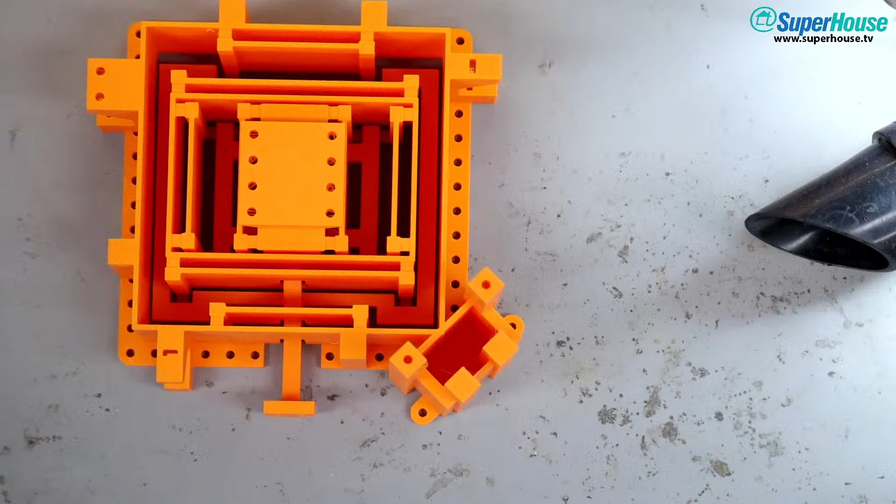Okay, here we go, hang on, I do have to cough. All right, I'm going to do this manually. I'm going to throw to - which camera do I want? Camera 3, okay, camera 3 we have. And this just came off the printer overnight. Look at this beautiful monstrosity. This is Vic's latest creation.

And I will explain this a little bit in - well, how about right now? So this is the core of the most recent RepRapMicron design, and it is called a PIKA, P-I-K-A, which I think is print in place kinetic assembly. Vic, is that correct? Yeah.

So yeah, Stephen says there's a lot of flexures. Yeah, this entire thing, I haven't done any cleanup on this yet, so it's got a couple of little nibbly bits that probably need to be cleaned up, maybe in some slots where nuts are inserted. This entire structure is printed as a single piece.

This is one print-in-place assembly, and you can see that it's got a whole lot of flexures going in a whole lot of different directions, all interleaving so that they offset each other's dimensional distortion. This forms the main frame of the RepRapMicron, and then this is the platform used for the build surface.

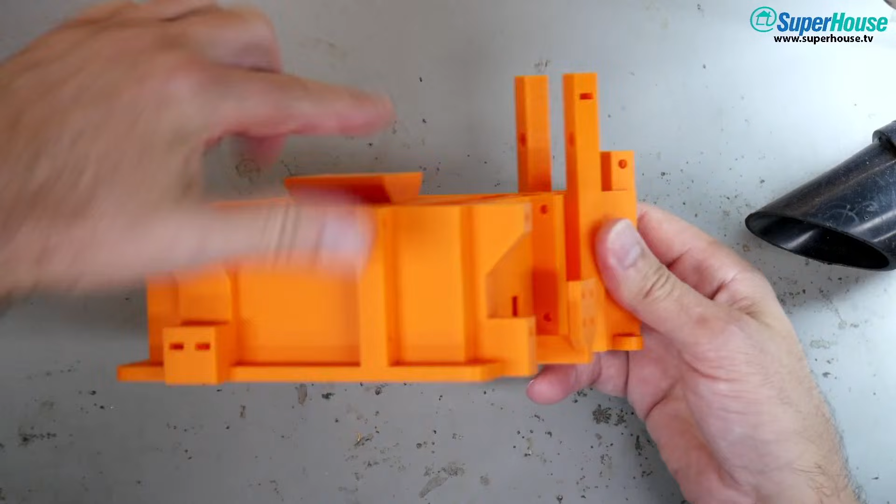XY structure that keeps the dimensional accuracy between this top surface and the mounting plate that goes under here. So as the plate moves, these flexures keep it in that plane. Each set of flexures allows distortion in one plane or the other plane, but not in this one, in the Z-axis.

And then it's got all of these mounting locations around it that are used for attaching the different axis drivers. You can see there are some little slots in here where nuts are inserted and then bolts go through. So in this case, a bolt would come through from above and through the nut, and there is clearance on the bottom for the end of the bolt to come through.

So yeah, this is a crazy work of art. Vic, I am impressed. And this is a single file designed in OpenSCAD. So you just render it in OpenSCAD, export it as an STL, send it to the printer, and it even prints without supports. This was printed without supports, and it just popped off the build plate looking like this.

This is probably one of the more complex things I have ever seen created with a 3D printer in a single piece, for sure. All of these interlocking pieces that all do important parts of the job.

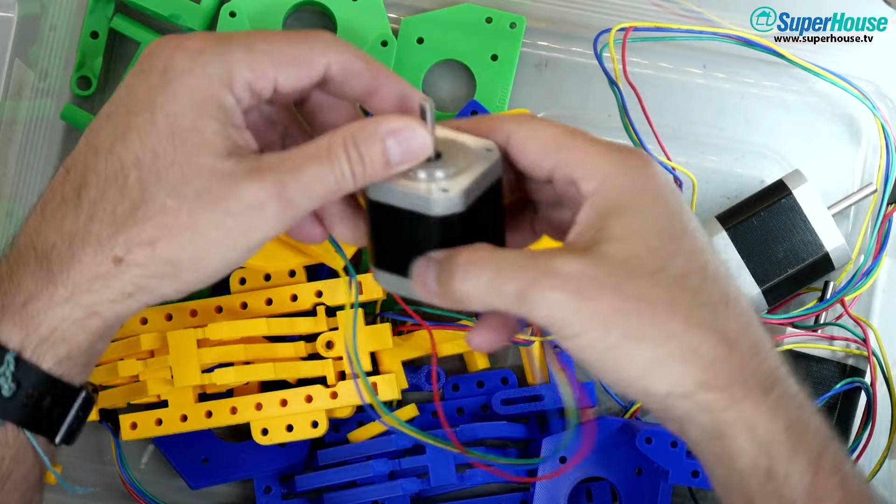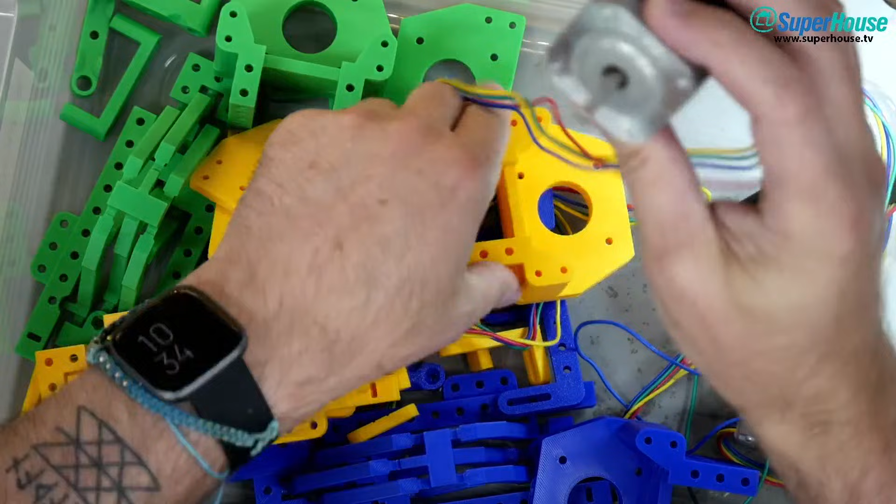Now we've got the 3 axis drivers here. Another part that I do not have yet, oh well, I kind of do. I printed these. This is the adapter coupling that goes onto the motor shaft, and then there is threaded rod that comes out here. So this is how, oops, there'll need to be spacers in there, but for now I'm just going to stick this straight on.

So the stepper mounts into the bracket like that, the motor coupling goes onto the shaft, and then the actual drive shaft attaches that way. So I'll pop that out for now. But these are a slightly outdated design, I think. And also, I want to reprint them because it's a little bit hard to see on camera.

This is what I was talking about last week or the week before. I printed these onto the smooth high temperature engineering build plate, and it suffered a little bit from elephant's foot. So it squashed down the first layer, which caused it to spread out, leaving a little ridge all the way around the outside. That in itself is not a problem, I could just trim it off with a blade. But you can see the structure on the inside here is this little spiral structure, and all of those also have that elephant's foot closing up the gap between those little parts of the structure.

I could go through with a scalpel and very carefully trim the insides of all of these, but I think the simpler solution is that they don't take long to print, they're only little things. I'm just going to print more of these on the textured PEI plate, which is what I've used for all the other parts, and the first layer result on those is good. So I'd rather not compromise it. I want to give this whole project the best chance of working, so I'm going to do it properly. So let's switch back to my ugly face and have a look at a couple of things.

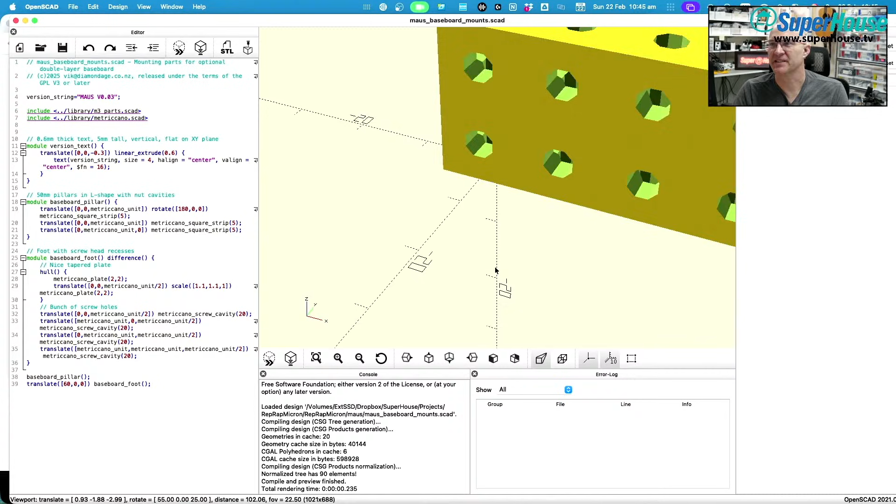Nope, that is not it. Ooh, Amanda has just sent me info about the external encoder that she uses. Thanks, Amanda, I'm going to check that out later.

Now, what I'm actually looking for — so those are mounts. What I want is the baseboard. So that's baseboard mounts, complementary maus pika, maus probe, stage deprecated. Maybe I'm looking in the wrong place. Vic is probably shouting in the chat right now, telling me where it is. Chris Ben says, plot twist, TTS was causing the slowdowns. Geeko Farm said, what are you looking for?

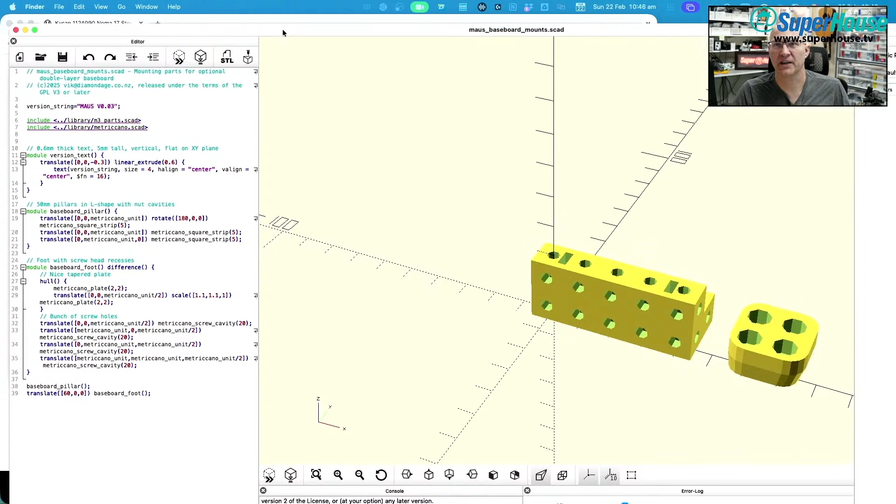Okay, what I'm looking for is the baseboard, off the ground so you can hide the electronics underneath. I thought there was previously a laser cut base out of acrylic with a whole lot of holes in it, and that has now gone away, I believe — or there's a new version that needs to be printed. So is that replaced by this? Is this the equivalent? Oh, Pika's base is in the maus_pika.scad file. Okay, let's try that. It's commented out at the bottom.

Ah, okay, got it, cool. So then, if I — come on, why wouldn't it open? Maus Pika, oh yeah, this is it, I opened it previously. Open. Commented out at the bottom. So if I, hang on, I'm going to zoom that out so that we can see it.

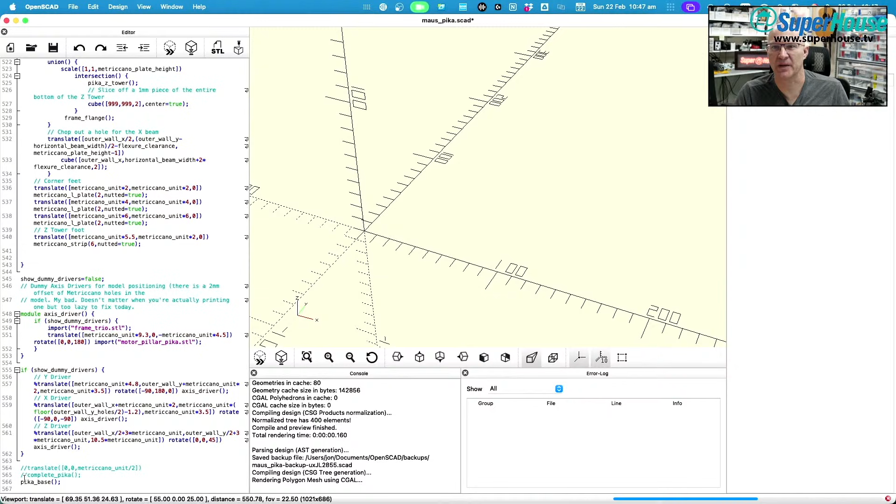Down here, Pika base — I will uncomment that and then comment out complete Pika, I guess. Let's find out, and render, let's see what happens. Is that done? No, maybe you need complete Pika as well. Pika base.

Okay, so that's what we need to print. I think it might be. So let's export the STL for that and send this to the printer.

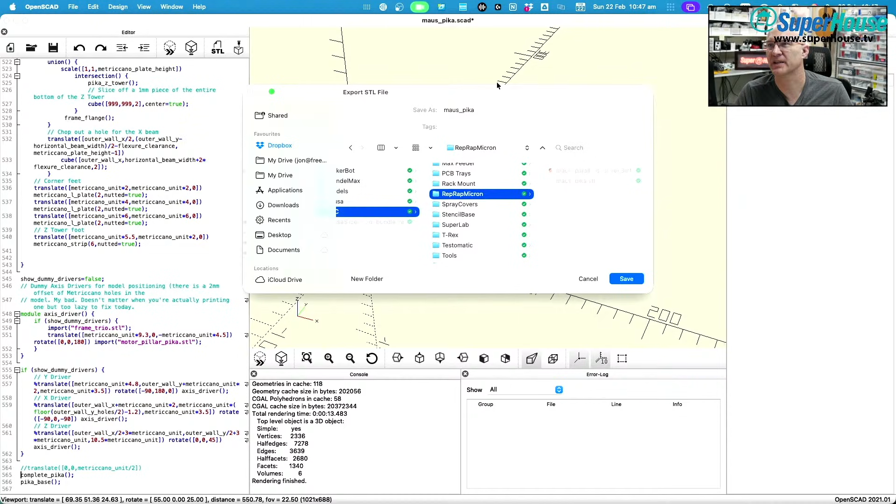3D printing, X1C, RepRapMicron, maus Pika. I'm just going to call it maus Pika base so that it's distinct. And Bambu Studio. Here we go. I'm going to send this to the printer so that it can be doing that while I get on with other things.

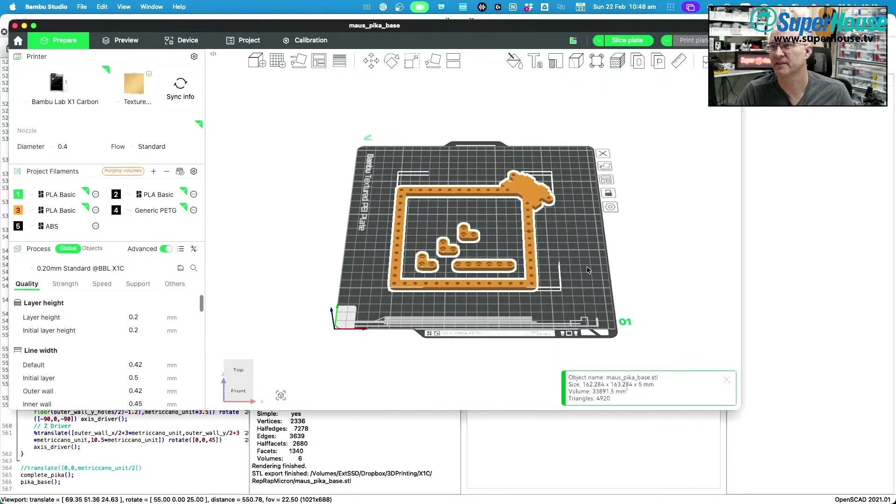Prepare, and I want to go to... no, that. Okay, and then I'm going to change it to the same color as I did the Pika itself. What have we got here? I don't think any of the settings really matter, I'm just going to leave it on standard. There are no flexures involved in this, so 3 layers on the bottom is fine. 15% infill should be fine.

Slicey and dicey. And, oh, hang on, did I have an extra option turned on? Slice okay, I just wanted to turn off... oh, it doesn't matter. The preview here shows the flow calibration being done, but I don't think it actually needs it to be done. Time-lapse, flow dynamics, auto leveling, everything off.

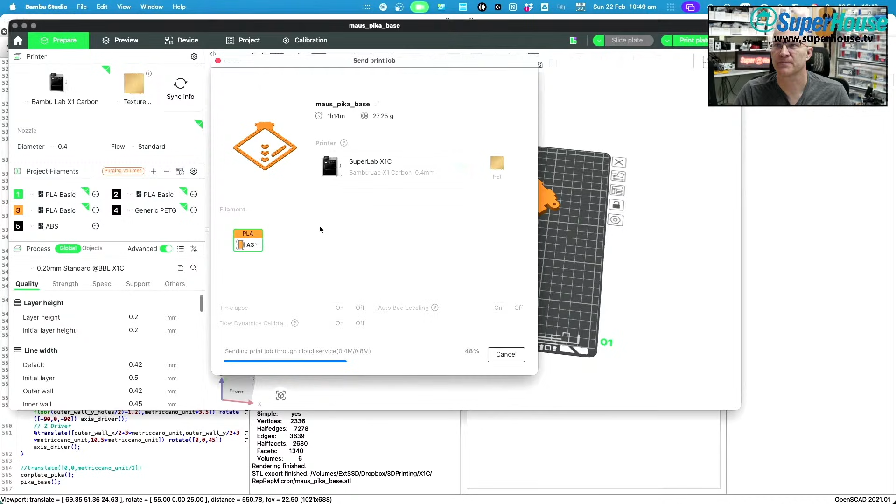Send it to the printer. Go. 1 hour and 14 minutes - that's a pretty long print. It's surprisingly long for something that's only 27 grams of filament. Why is it 1 hour and 14 minutes? It's a little odd.

Okay, so Vic said the little angled bits and strip are basically feet to hide the nuts in so that they don't scrape the table too bad. Okay.

Using a 0.2 nozzle. Oh no, it's not a 0.2 nozzle, it's a 0.4 nozzle, but 0.2 layer height. I think that should be the case. So we've got, yeah, layer height is 0.2, minimum initial layer height 0.2, but the actual nozzle is a 0.4. Others, I'm not even sure where it's set in here. Advanced... nope, don't know. Yeah, 0.2 is the layer height.

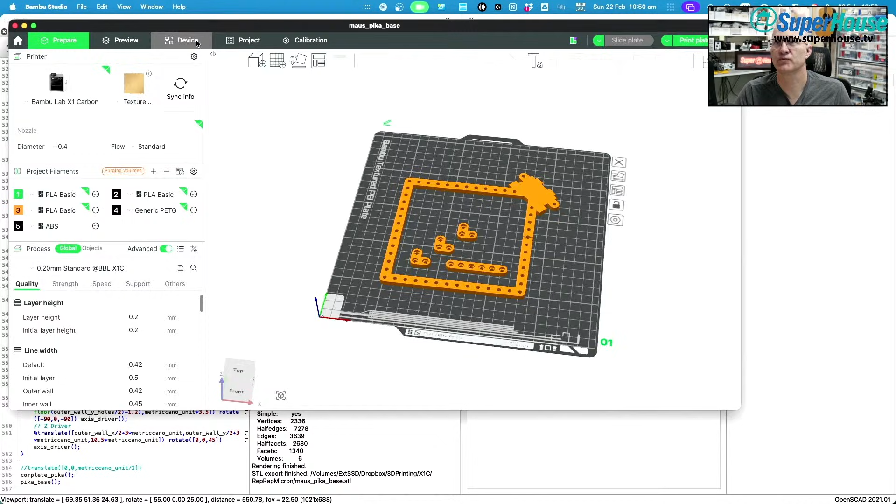It'll be taking a little while. It's got to get up to temperature, and then we can see what's going on with that. Oop, there it goes. Oh, and look at that, there are some googly eyes on it now. Googly eyes have been applied.

It was Pete who got me to do that on Friday because, yeah, I've been saying I need to put googly eyes on the printer for a while, and Pete came to visit.

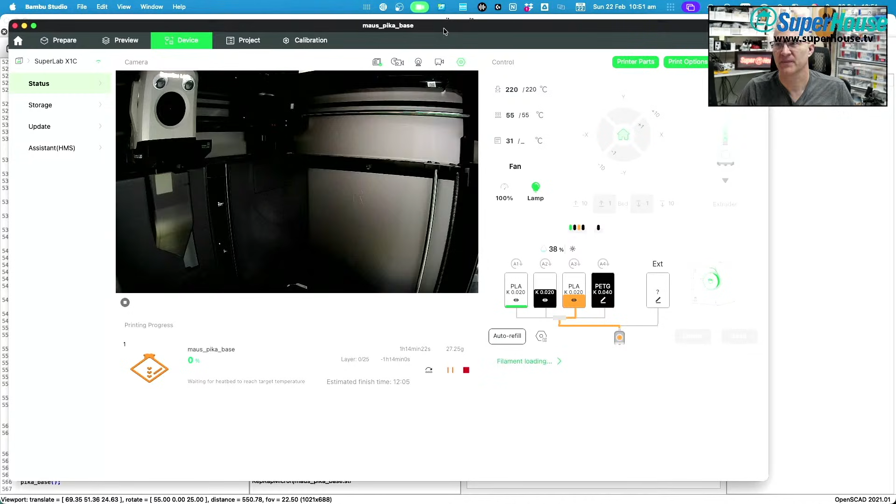Okay. Vic says, when I know where all the holes should be, I'll fill the rest in. Yeah, so a fair bit of the print time would be the features like doing the perimeters of the holes. And if you can eliminate those features, it'll print more quickly. But for now, it's fine.

Okay, let's move - Imi isn't here to see them. Imi isn't here to see them. No, hang on, I'm going to bring this up. Quick, take a screenshot - these are Imi's googly eyes.

What's actually disappointing is that the field of view of the camera in the printer does not show the top part of the extruder when it's printing. Like if this is over in the middle of the bed, the eyes are off the top of the screen and you can't see them. I think it'd be funny to see the eyes jiggling around as it's printing, because the printer moves so fast that they would jiggle for sure. Jiggle, jiggle, jiggle, yeah.

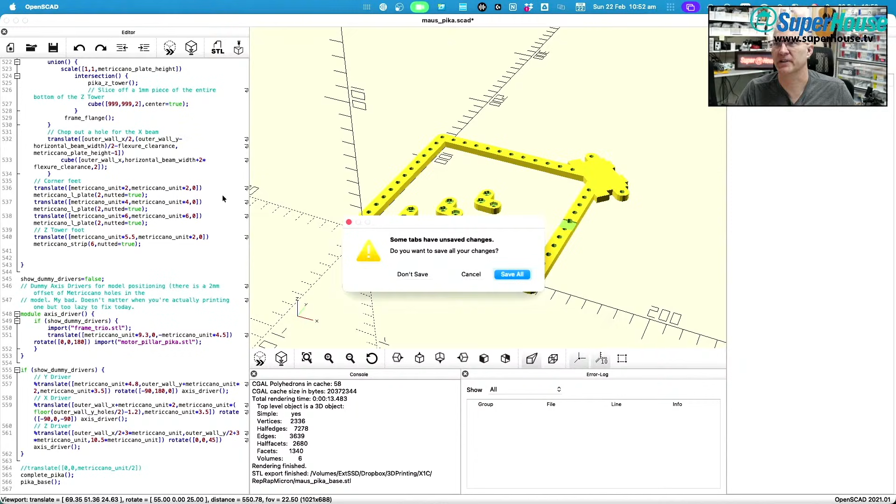So, what am I doing? What am I doing? Okay, so we've done that, we've sent this to the Printermatic, and I'm going to quit out of that. Don't save. Close that. Then what am I doing?

Okay, I'm going to RepRapMicron, not my fork of it - I want to go to the original. RepRapMicron. Vic.

Let's find this. You want to create a print that maximizes the eye roll. Oh, that joke made me eye roll. Actually, no, it didn't - it made me laugh.

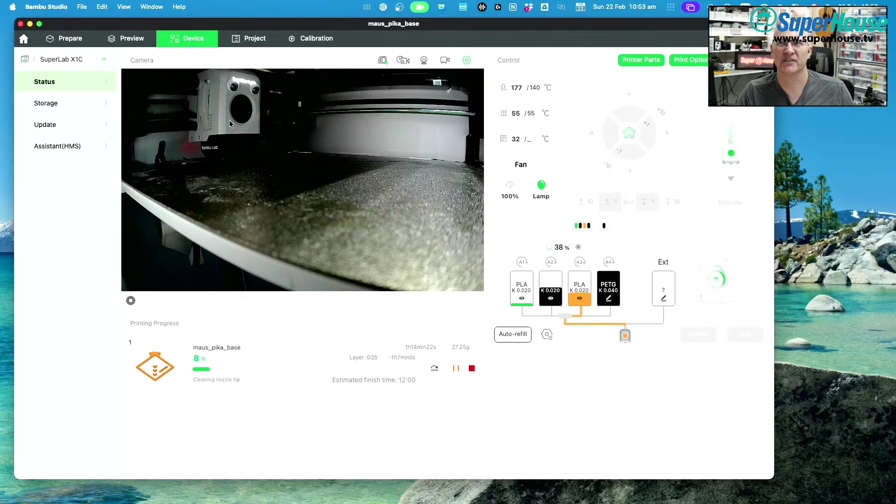Put the eyes on the bottom and then it prints upside down. Yeah, I want to put a smiley face across it. Hang on, if I get it back up on screen before it starts moving - see, it's got eyes here. This looks like a nose. This is the fan, like the top of the fan. And I want to put a mouth across the bottom of the grey bit, like a smiley mouth under there. This could be its mouth. Imi, quick, have a look - googly eyes. This could be its mouth, like if it's doing a shocked face. So this could be a shocked face, or that could be a button nose with a mouth under it. I think either works.

Yeah, so... Vic says, I was going to add an embossed squirrel just for you. Yeah.

Yeah, David says, no, that looks like a giant open mouth of, oh my God, what are you printing? Yeah.

So you can see the Prusa printer right there. You can't really see it because it's behind the X1C, the Super.

Yeah, there's a little bit of fumes that come off it. When the printers are running many hours every day, the cumulative fumes start to become a little bit annoying, which is why I relocated the X1C to the back of the clean-ish room, so it's way down there where ventilation can take care of it, and I don't have to...

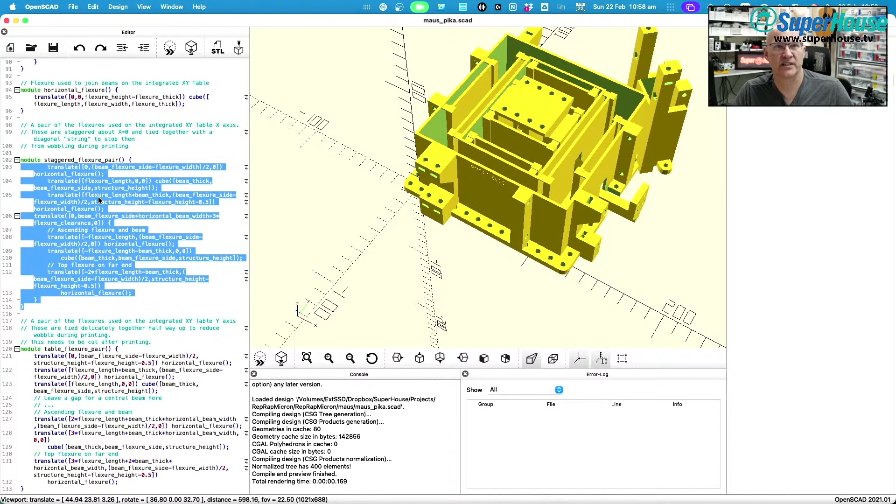And then because all of these variables are derived from values up here, what it means is that if you want to tune the thickness of the flexures, you change a variable up here, and then the geometry that is derived from it changes down here.

And so it's a process very much like compiling code, starting from the top and running down. It's got all of these things defined, and then you execute particular routines. So with complete pika enabled, this is what comes out. And there's this—where is it? This one, preview. If you click on preview, you can see it's processing all of that code and generating this view. And if you click on this one, I think it's render, yeah, so this goes through and executes all of this code to generate the model from the code.

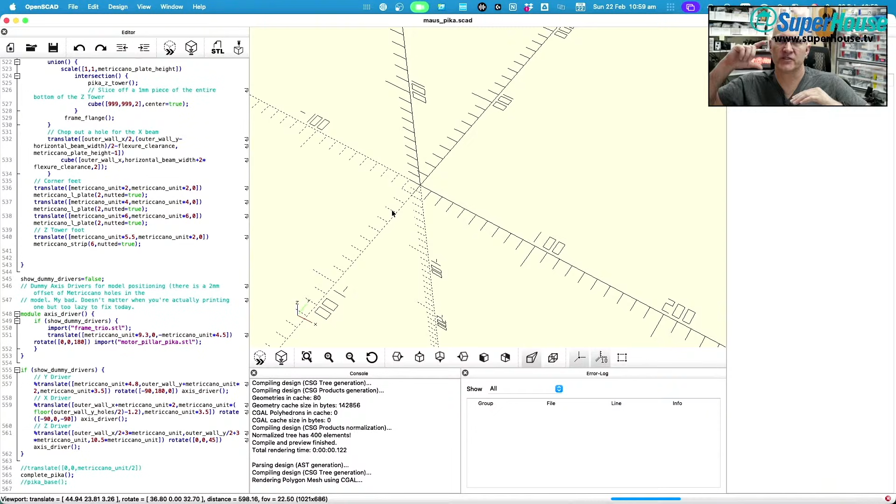So when you look at an SCAD file, it's just text, I believe. Let's find out. Nah, that's not... Rendering polygon mesh. Yeah, so it took a while to process, but essentially that was compiling a physical object from the code definition. And then, yeah, you can make changes and recompile and get the updated version of the object.

And then from there you can export to STL or do whatever you want to do with it. So it's pretty cool. It's very different to modeling in other types of systems.

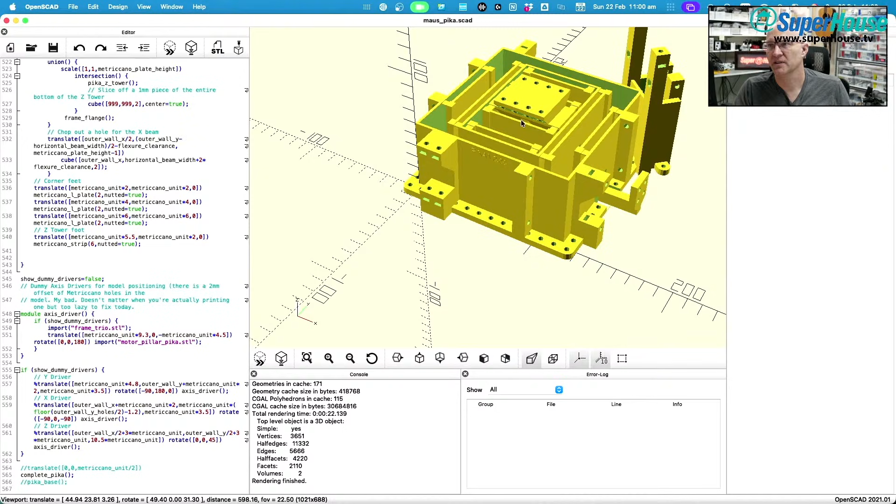Allow, log in. Let's see if it remembers. Maybe it will. All of this, all of what I'm doing on my phone right now, is to avoid standing up and walking over to the kettle to turn it on.

Oh, I don't care about your updates. Continue. Okay, Kogan Smart Kettle. Let's see, where is it? iPhone mirroring, phone in use. Okay, I'm going to do that. And now I should be able to go... Kogan Smart Kettle on. There. Now I can boil the kettle.

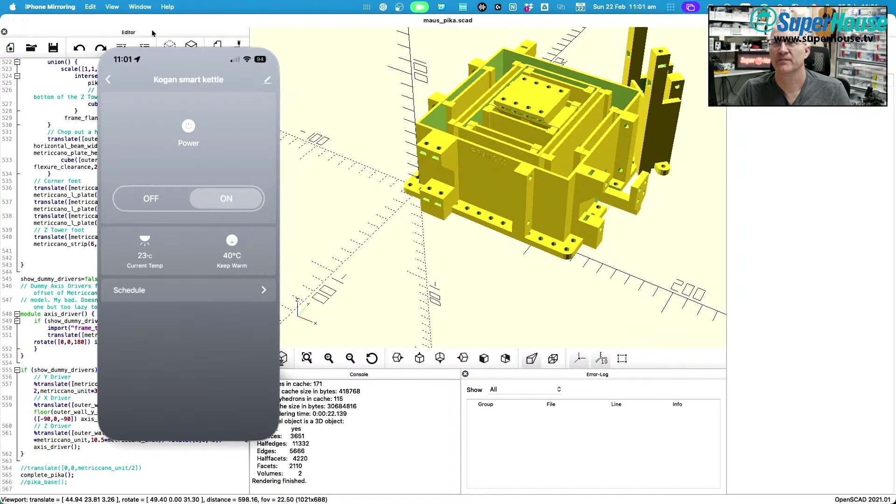Wonder if it's going to give me some info. Power is on, temperature. Yeah, you can probably hear it now. Kettle is boiling because I remoted to my phone from my desktop, which talked to their cloud service in China, presumably, which talked back to my kettle, which is 3.8 meters away from me.

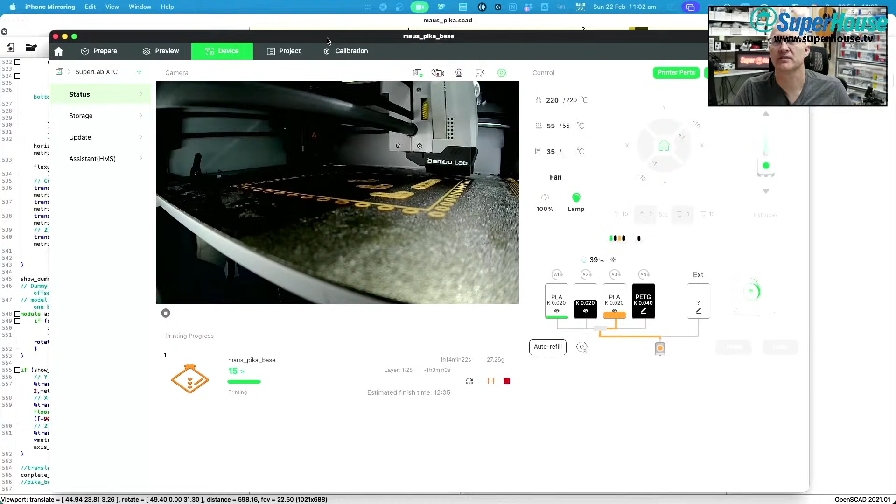Yeah, okay. So the question is, this is a question I should have answered before the stream. Where should I grab the... Imi says, can you turn my kettle on, John? Sorry Imi, I can't, not from here, not unless you can give me remote permission. The misappliance of technology, yeah.

Andy says, OpenSCAD is awesome, but obviously not as popular as graphical tools. Perhaps with AI coding assistance, the programming grind of using OpenSCAD will be eliminated, making it more popular. Yes, code, but yes. So I find it really interesting that...

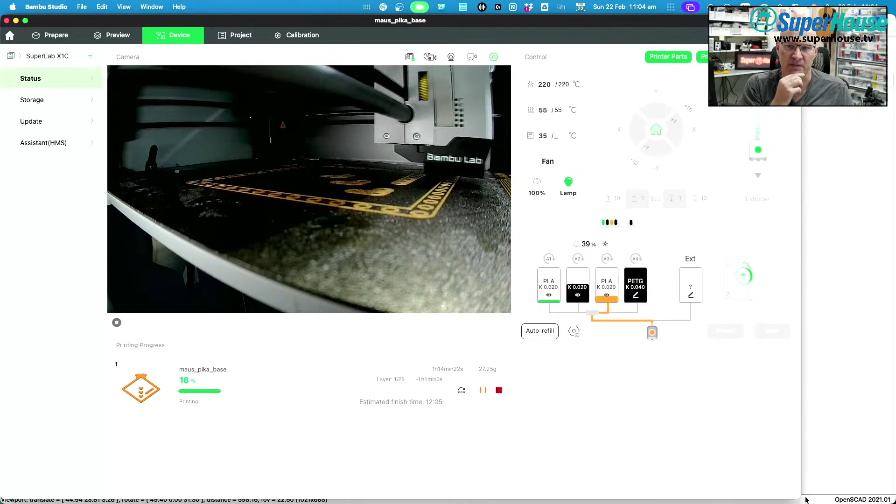I'm pausing because this is a rabbit hole I could chase that would take me way off topic, so I'll give a shallow mention: it's the move towards things like markdown files and just text files for documentation and other purposes, because they are so easy for LLMs to work with. If your documentation is in a more proprietary format, like pages in Microsoft Teams, the LLM may not have access to it. But if it's text files sitting on your disk or in a repo, LLMs can read those. So we've seen a move towards Markdown.

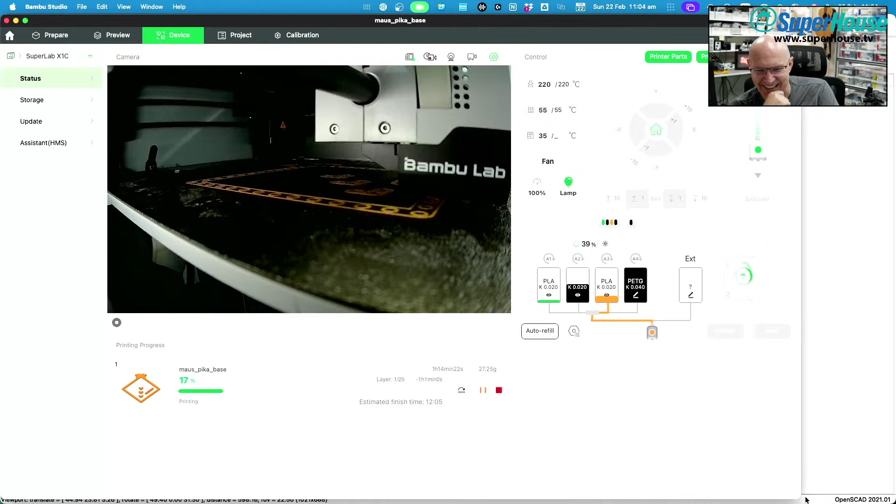Henrik, what is that face? Yeah, that is a weird face, but thanks for the super chat.

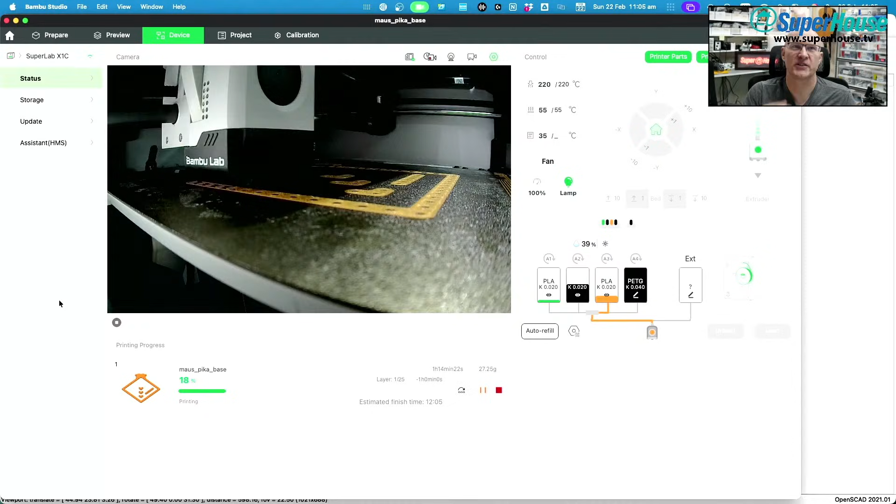Geeko Vic says, ChatGPT sucks at OpenSCAD. That's interesting. So it is really good at generating Verilog, for doing things like FPGAs. Esoteric things that have text files as their low-level format, AI is generally really good at dealing with. So it's like this weird resurgence where text-based history that we'd moved away from is given new life. If your documentation is pages in MS Teams, real people are able to reliably read them. I was just using that as an example of some way information can be locked up in a proprietary format and not so accessible to AI.

Anyway, I'm not going to dive down that rabbit hole too much. Now, where was I? That's right, I'm going to get back out of this. We don't need this, I want to start actually bolting some stuff together. Let's figure out how to do that. Hang on, I've got to cough properly again. Okay. And the radio voice is back for about 3 seconds.

Sorry, I am losing the plot again. So, V4 upgrade section. Now, is there a... oh okay, so this is the old flexure table construction, which I've printed. Those parts are back there behind me, but I don't think these are relevant anymore because it has all been replaced by the big fancy picker. So we can ignore all of this. This, I believe, is the system that Vic had demonstrated at Everything Open, which is also really cool, but that doesn't help for my assembly of the new XYZ stages.

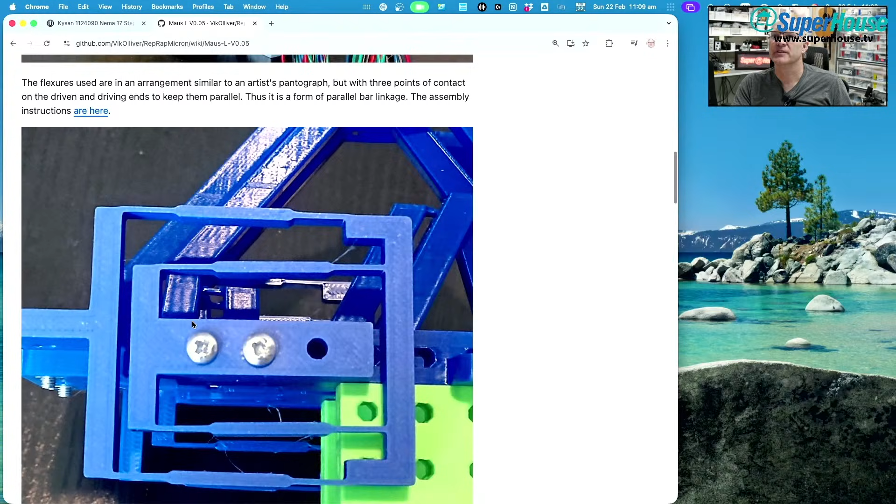Amanda_RFT said, "Is it time for coffee cam?" I think it's time for coffee consumption. It's similar to a pantograph.

So these photos are based on the V0.4 pre-picker. Look right, John - up here? Maus XY flexure table construction - is this what you're talking about? I think I've already found it. Right side of the page, Maus axis driver construction. Oh, there - yeah, cool, so that right there. Axis driver, nice. Hang on, I've printed mine, it almost looks like that.

I've got one printed in that blue, almost that blue. So 3 of these completed assemblies are needed, and they are identical, apart from one, which has a slightly shorter mounting thing here - it's got 2 columns of holes instead of 3. But apart from that, they are identical.

Part preparation, okay. 3 fasteners need to be prepared - these are the most complex machining operations in the assembly process. Also some wiring. Select the most pristine M3 by 50mm screws available. What do I have here?

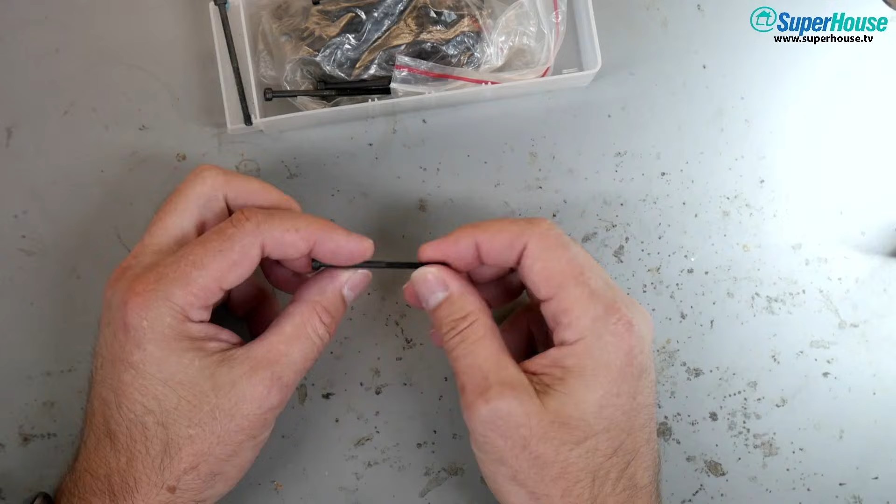Yes, okay, so there's a little bit of preparation to do. What I'm going to do is switch to overhead view. Oh yeah, these are the M3 50 millimeter bolts that I've got, and they are actually pretty decent quality - nice ones, but the thread is just from there to there, and then it's just plain shaft from there to there. So possibly not suitable, depending on.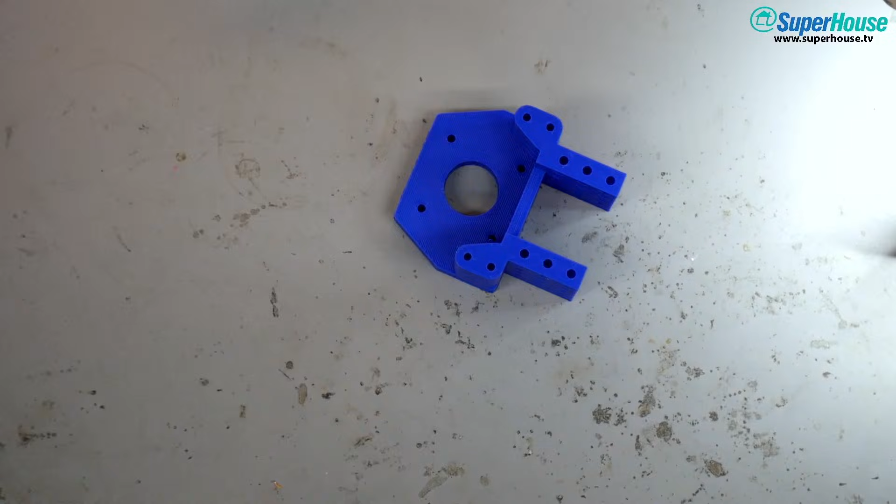Yeah, less yapping, more tapping. Let's throw some of these things up on here. So I'm going to get all the parts out for the blue axis and use this as my... whatever, first thing. Whoop, whoa.

Okay, putting that aside, the funky thing. We've got the spacer plates here, we've got the NEMA 17 mount here, and there needs to be a little bit of cleanup in some of these holes because nuts need to go into these spots. What else do we need? Where else needs cleanup? That looks good. That needs a little bit of cleanup. Little bit. Okay, I'm just going to get on with it.

So, talk amongst yourselves. No, talk to me, come on, use the TTS. Take advantage of the fact that I'm away from my computer right now. I can't actually see the chat properly, so if you want my attention, you're going to have to TTS it.

Yeah, this is not the most exciting part of the process, but a bit of cleanup now, hopefully, will make things easier when I'm putting it all together.

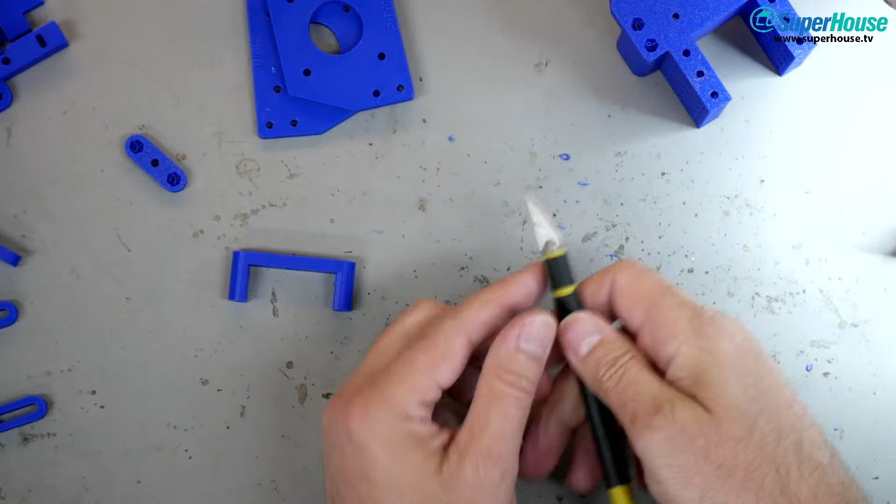Yeah, I should get myself one of those little deburring things that's got a handle with a thing that comes out shaped like that, and it's on a spinner. So you put it into a hole and go, and it cuts out the edges on the inside.

So yeah, I've used those before. I know people who have them, and they are very cool for cleaning out things like little edges of round shapes. They work very well.

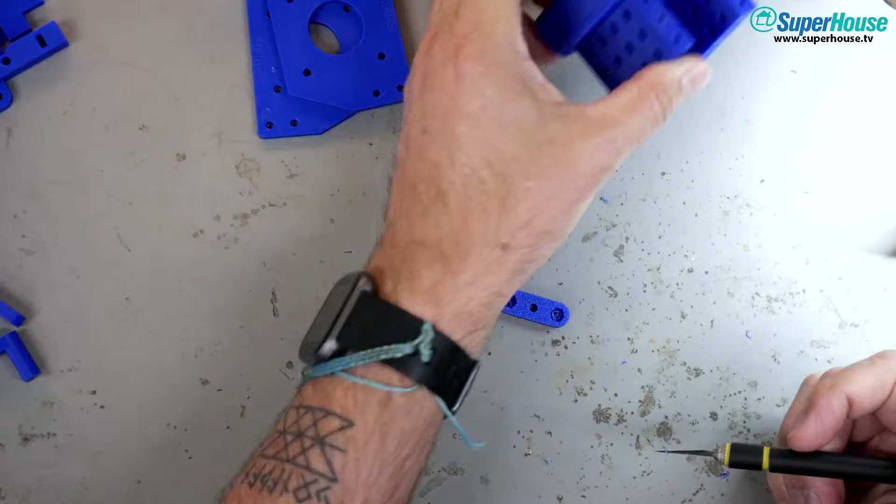For example, with this, if I wanted to clean out burrs on this edge, it'd be perfect. You'd put it in and just go whoosh, and it would all be neatly cleaned up.

But I don't have one. I should order one. So many tools that I want to get.

Okay, I am, as you can tell, having trouble talking. I find it really disconcerting to be isolated from the chat. Right now I am doing this and looking at it.

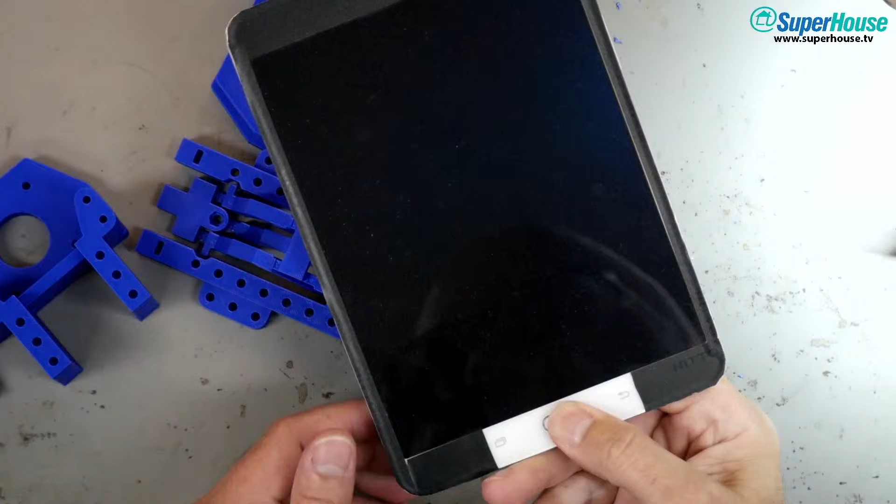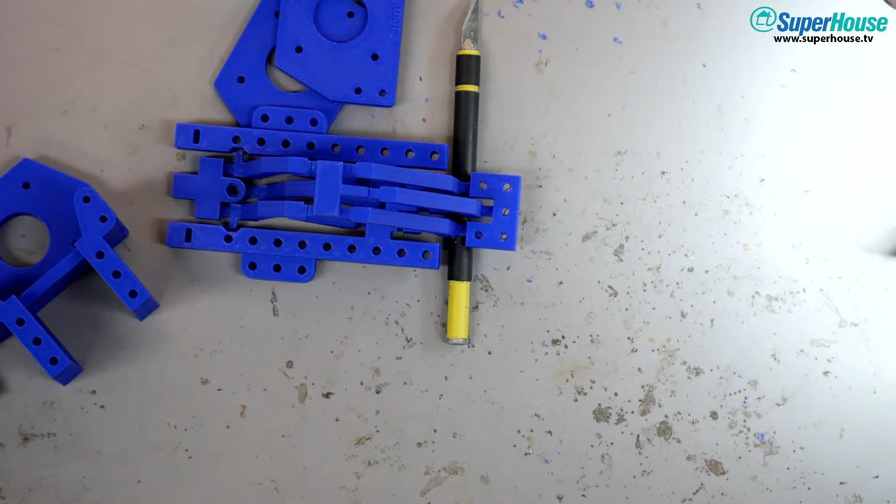I forget that this tablet is even here. This was Chris's tablet originally. This was attached to his wheelchair, and...

Nick bought a Samsung Galaxy phone. Chris bought a Samsung Galaxy tablet because he thought the big screen would be handy attached to his wheelchair for reading books and that sort of thing. And he ended up just not liking it.

How much battery does this have? 42%. This has been sitting up on the shelf above my bench for, it'd be months since I turned this on. And it's still sitting there, 42% battery.

Okay, swipe screen up to unlock. I'm taking this off camera right now. Okay, swipe screen to unlock.

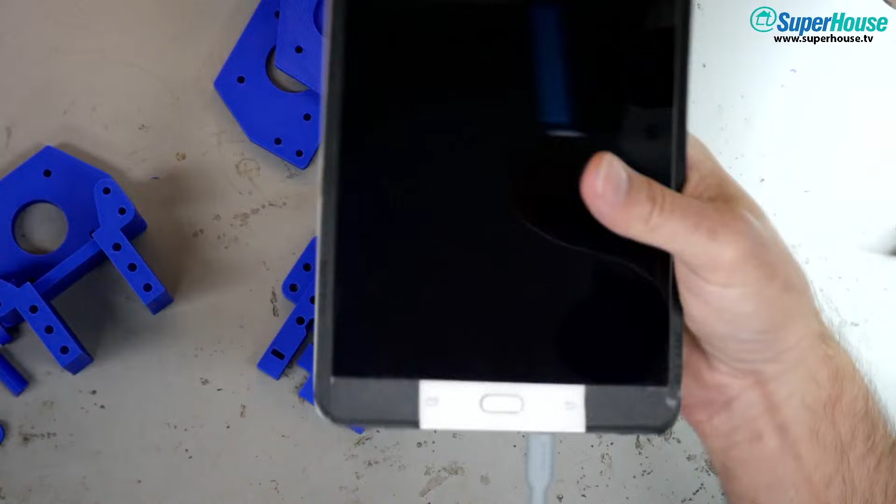What was I saying? That's right. So Chris got this tablet and attached it to his wheelchair, and it was just so large and awkward that he didn't like it. Later, after Nick died, Nick's Samsung phone became available, and Chris got rid of this, took it off his chair, and replaced it with the Samsung phone.

YouTube, come on, open, switch to YouTube. Oh, this version of YouTube is out of date. Look at this, no updates are available for your device. Okay, I'm going to have to do this the hard way.

This is a very, very out of date device. In fact, I wonder if... oh yeah, got it. I wonder if this browser is even going to work. Come on, give me a keyboard. YouTube.com, go.

Here I am doing something silly when I should be working on this. It's taking a while to load.

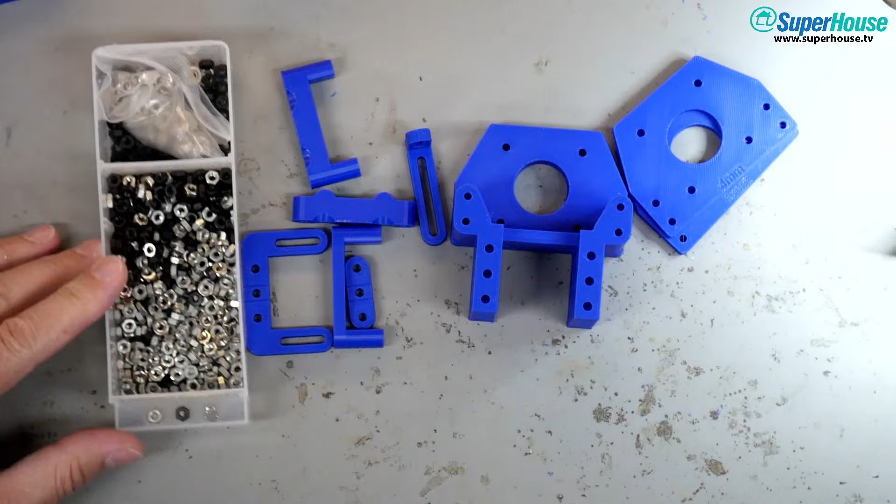M3 nuts, okay, M3 nuts, here we go. So this thing has these captive nuts, and then these spacers go here.

And the motor goes in like this. So what happens is that we will end up with bolts that go through from the top side through the spacers into the motor, but we also need to allow for bolts going in here and gripping on nuts in here. So once these are together, we will have nuts captive between the layers of the spacers and the main mount.

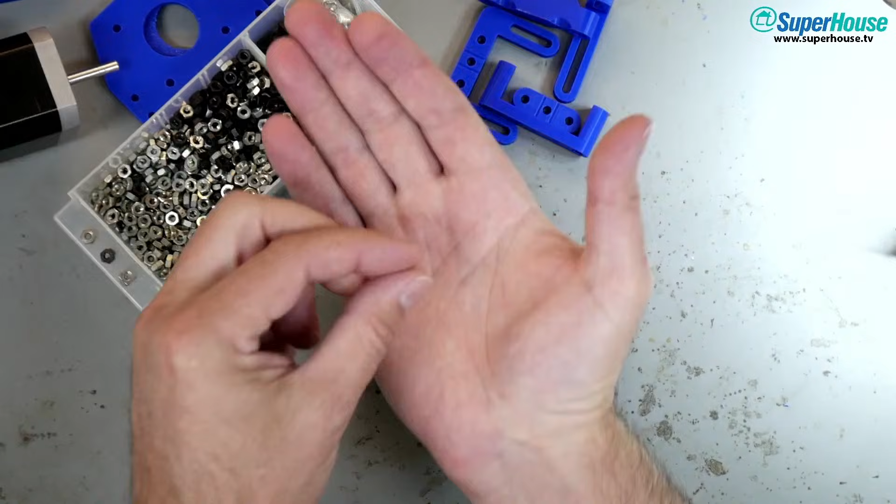So I need to insert some nuts in there. I've got a few different sizes of nuts here, and these M3 nuts actually vary in their body. These ones are a stainless steel sort of finish, physically larger, and I'm not sure if they will even fit. No, they won't.

There are some others here, these black-bodied ones which are fairly small. There are some here with a matte sort of finish, and I think I want to use those ones. Boop, got away.

Oh, what am I doing? Got away again. So I think these are the ones I want to try to force into these holes. I feel like I need a hammer at this point, a little tippy-tappy hammer. What can I use as a tippy-tappy hammer?

Okay, hang on, I'm going to just make sure the volume is off, and I'm going to open my own stream so that I can see the chat. Where is the chat? Where is... yes, I'm looking at myself. Here we go, my own stream.

Now where is the chat on this interface? I want to see the chat. No, I can't do it. I can't see the chat.

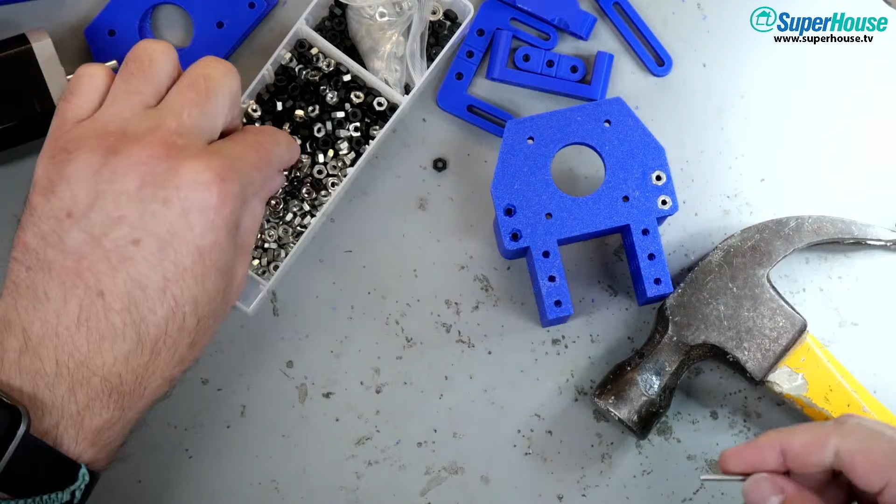Yes, so whoever it was that suggested using a bolt to put these in, a sacrificial bolt, thank you. Was it Austin? I can't remember, someone said it in the chat a minute ago.

What? Okay, you need a fret hammer, says Gerald. Yeah, there are many, many different types of hammer. Yes, jewelers do have interesting hammers. They have ones that are like they're just a cylinder coming out, and then like a flattened part at the back, and all sorts of different types.

Get the hammer out of the way. Where are we going next? The Toolman Oxide, The Toolman. I like tools. Now where am I going next?

Clearing out cavities. I'm going to switch back to this view just so you can see what I'm looking at. So what I have done is this stage here, you can see the nuts are now inside these little recesses.

Austin's_creations said they also have really nice files, sanders. Files and sanders, yeah.

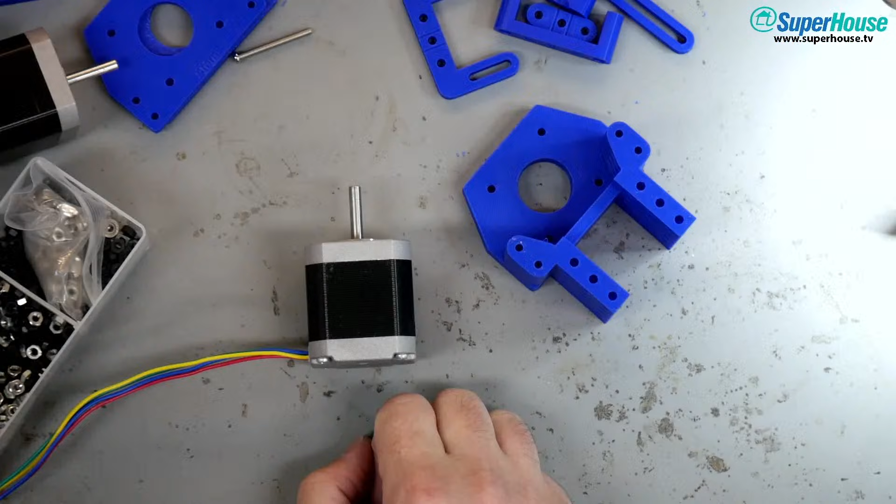These steppers, you have a Bambu. Let the thing rip, let the thing rip. Yeah, but the problem is that it is currently ripping. Right now it is ripping on this. This is what my Bambu is doing at this very moment.

So it's got 32 minutes to go. It's going to finish at 12:09, which by my calculations is approximately half a cup of coffee after finish time of the stream. So, yeah, let's see what else I can do.

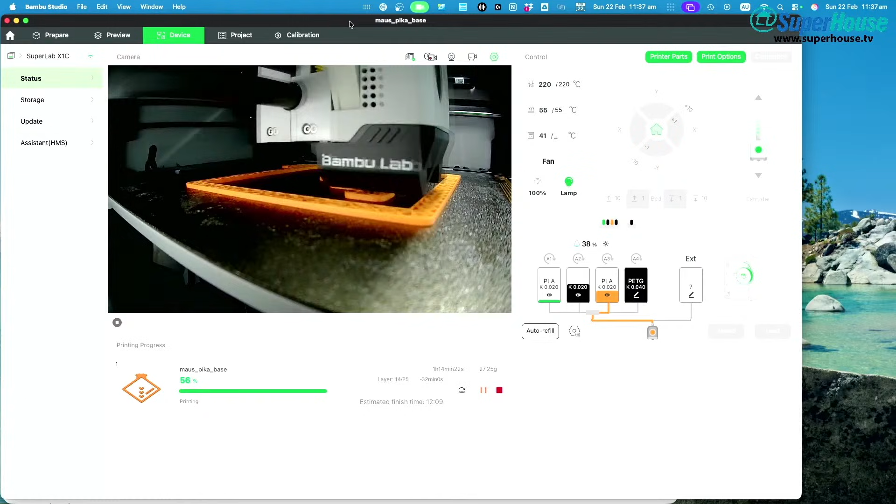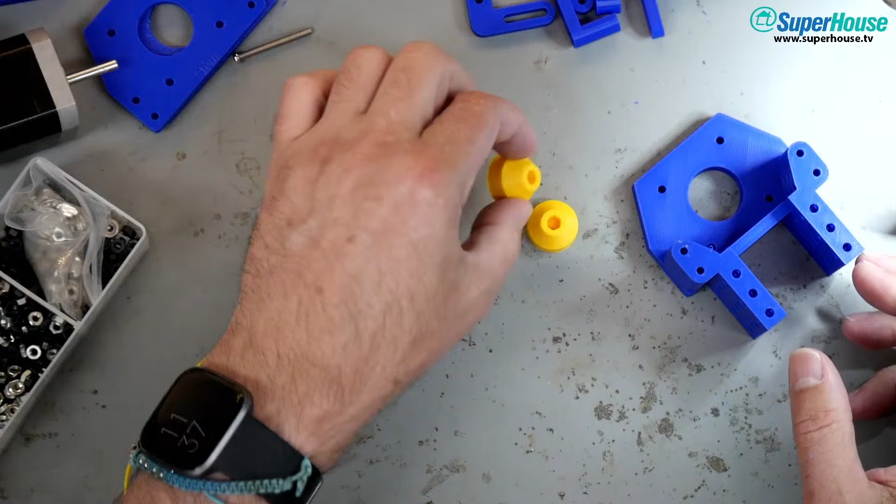Do I, don't I? I am kind of inclined to attach the parts, but I also want to get the colors matching. I don't want it, I've printed 3 of them in yellow. All right, coming back to here. What I have is, when I was printing the previous version of the hardware, I printed these. So these are the 3 axis couplings, and they are all in yellow. Now one of these axes is yellow. Maybe I should assemble this one.

8 minutes into bodge time. In fact, I'm gonna do that. I'm gonna put this aside and grab this and tippy tap some nuts into this one. I just clean these up a little bit. Doesn't need that much cleanup.

Am I on the right camera? Yes, I am. Good.

Clean these up and yeah, and then I'm going to attach the coupling to this motor. Now, I know that I am going to have to do something about the motors. I will order some 400 steppers, some 0.9 degree steppers. But for now, I'm going to assemble this with the 200 steppers that I have and swap them out. I fully expect that this project is going to involve teardowns and rebuilds and those sorts of things over the course of it,

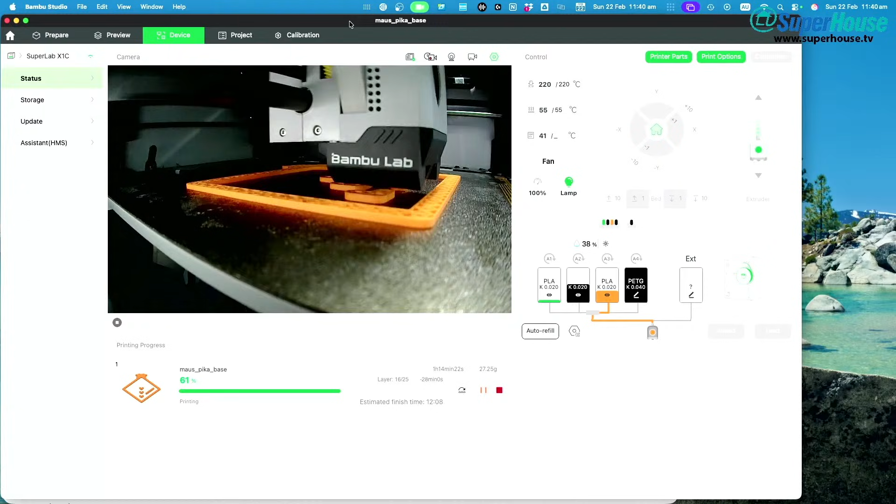Now, where are the clamps? There were some there, but they are no longer there. Ah, here we go. Here is, this one will probably work. It's in kind of crappy condition, but it is the first one that I managed to find. Oh, what about this one? Okay, I've got a couple of options. Here we go. There are dozens of these of different types around the factory, but we'll give these a shot. Back to here. So I've got this, I've got this. I'm going to try this little one first.

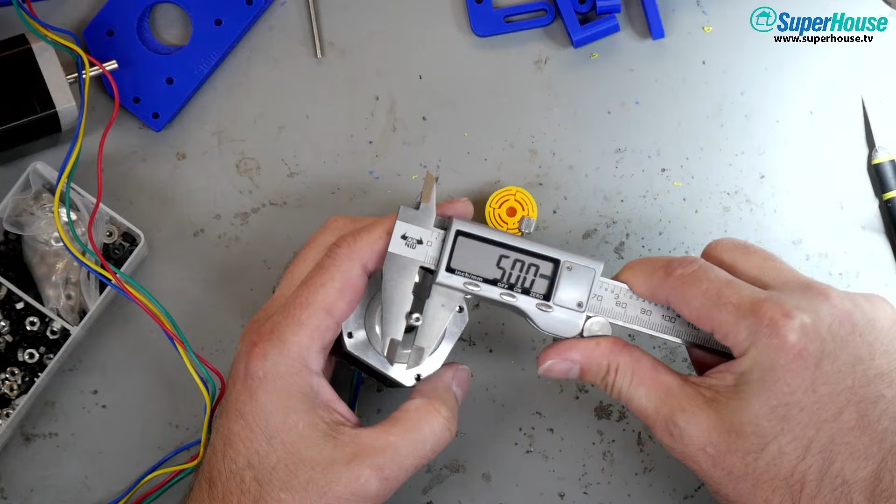So what I want to do is squeeze that onto there. Squeeze. So, got to get that on the shaft. Maybe I should drill this out first. What is the recommended best practice here? If I check, this motor shaft should be 5 millimeters, 5.00. And this, whoops, is 4.6-ish. Should this be drilled out?

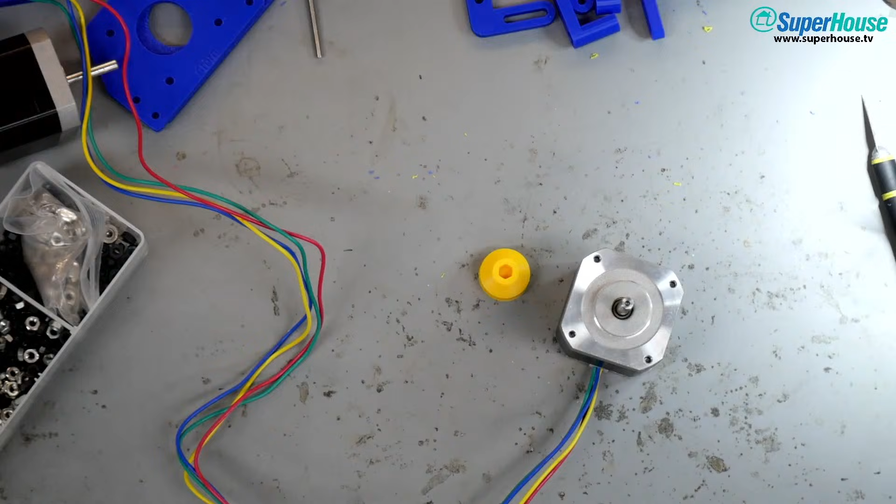I mean, this isn't, you always end up under-reading with this sort of thing. When you're using calipers into a hole, they will inevitably under-read, but still, that is, yeah, tight. So, I could drill it out and use something to attach it, like Loctite. You'll probably smash them when squishing in the vise anyway.

Oh, okay. RelWareTep said, 18 minutes. And Grant said, use the ones you've already printed since you'll probably replace the steppers.

Yep. Ooh, that was a PCB falling off the wall. Why, you might ask, do I have a PCB on the wall? Okay, I have many PCBs on the wall. Nobody question it. Everybody just ignore that that happened and back away slowly.

So, at this point, yeah, stuff it. I'm just gonna ream the first millimeter or two with a 6mm drill bit.

Okay, I'm actually going to, Vic, I'm going to read your instructions. Here we go. Okay. Drive the bottom flat with maze-like patterning end of the coupling onto the NEMA motor.

People don't have PCBs on their walls. Yeah, I know, it's surprising. Doesn't everybody have PCBs on their walls?

Until the shaft contacts the flat shelf inside of the coupling's cavity. This is recessed approximately 7mm. You may find it convenient to mark this off on the shaft. That is an excellent idea.

If the print suffers from elephant foot, ream the first millimeter or two with a 6mm drill bit, except that in my case it's 5mm. Gentle squeezing pressure, or a more percussive approach. I'm going to go for the squeezing pressure. Rotate the coupling and by eye ensure it's correctly centered on the shaft. And push down to ensure, etc.

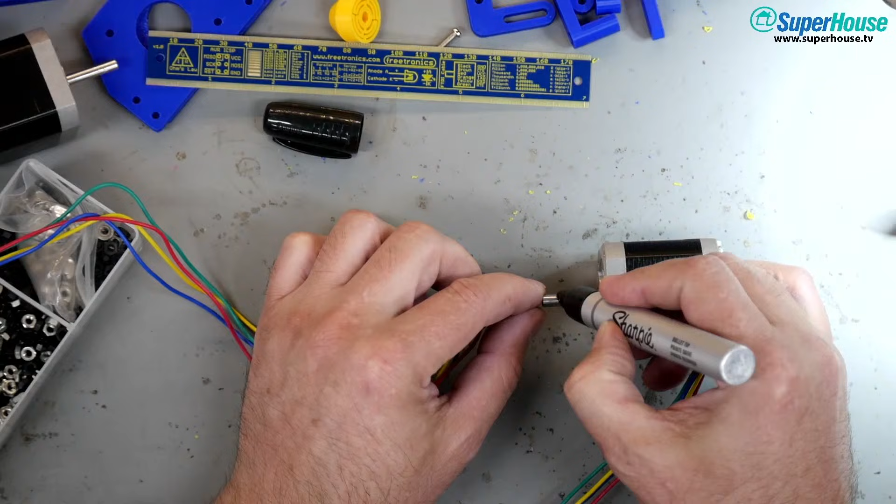So let's just do, oh, I know, I forgot the excellent tip from the excellent Vic, which is marking off on the motor shaft where the 7mm point is. 7mm is right about there. Okay, so if that black line is just going into, like just align with the back of this, then we should be good, it should be in far enough.

Okay, doing it for real this time. Squeezy, squeezy, squeezy. Oh, it does not want to go in. I do think I need to ream that hole out. I don't want to put more force on that, I was starting to squeeze it quite hard.

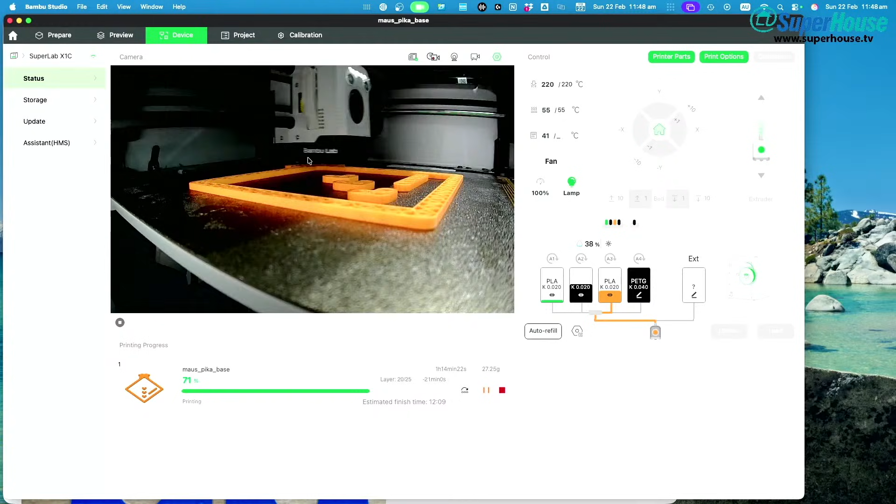I am going to, ideally we want something like a 4.8mm bit, but I don't think I have one of those specifically. So once again, I'm going to leave you with the active screensaver and have a look at my drill bit situation, see what I can find to ream that out with. I could just keep working it with the scalpel, but let's try to be slightly less unscientific about it and find a real drill bit.

Ooh, there's a 4.5mm bit. I used to have a 4.8mm bit. I'm just going to bring this stuff in and have a look. I should probably also bring in a drill. That would be a sensible idea, wouldn't it?

Back to here, back to here. What you want is a reamer set. Nothing there. Yeah, what I want is a reamer set. That is a 4.5mm bit. So that is possibly going to help, but it may, yeah, no, it needs more than 4.5mm, 4.5 is loose.

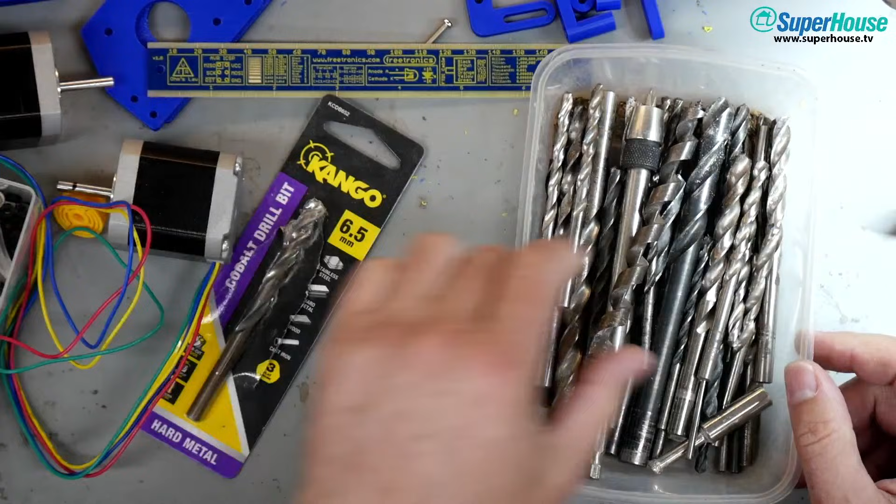Get that out of the way. What have I got in here? Not that one. So what am I looking for? I'm looking for, this will be too big I think. 5.14. What? This may actually be a 4.8mm bit, which would be kind of ideal. Okay, that was this one that I was doing. Let's see if I can ream it out a little bit with this.

Oh, it seems to be doing stuff, doing something.

Let's try not to cut my fingers at the same time - that wouldn't be part of the plan. Don't want to overdo this either. Of course, what I take away, I can always put back in the form of glue or Loctite.

Okay, I'm going to grab a drill to put that in - that way things can go wrong even faster. If there's a way for things to go wrong, you can make them go wrong faster by adding power. Here we go. All right, everybody say goodbye to my fingers - this is the last time you'll see them attached to my hand.

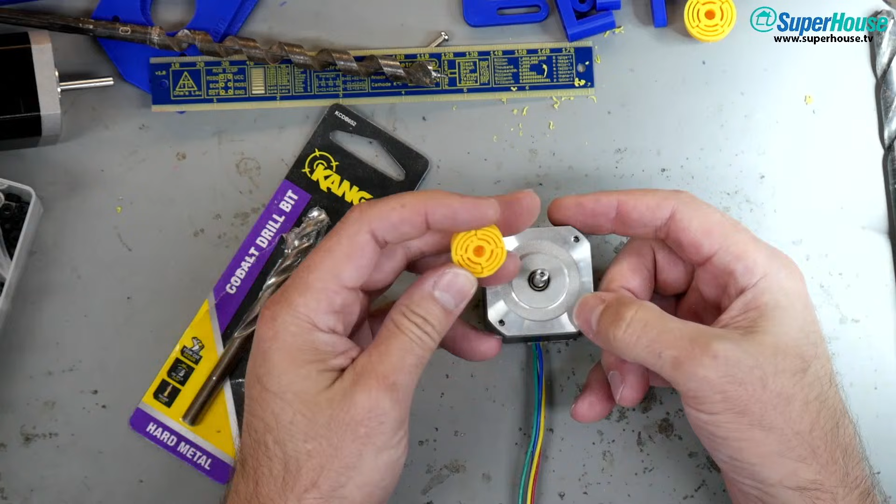So do I glue, or... I mean, I've got two more here that are this color. I want to reprint them in other colors to match the other axes. So, okay, this one is now bored out too large.

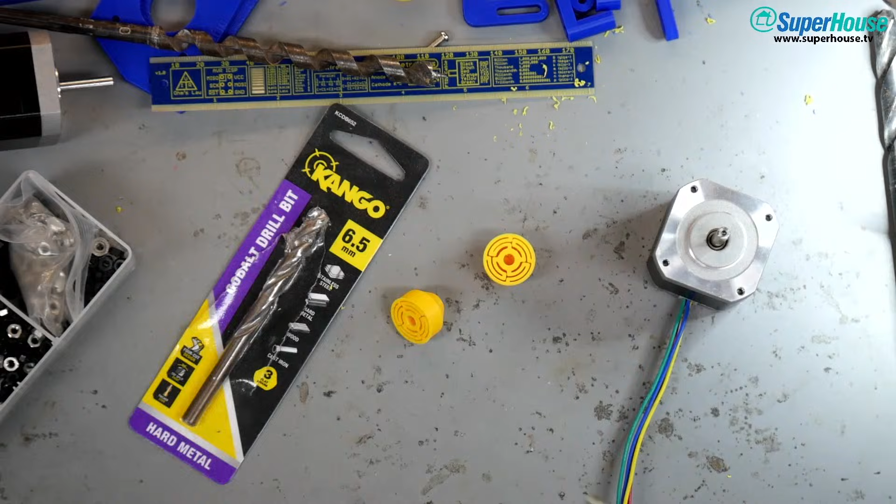What I'm going to try is use this on one of the others, but not go all the way in - just ream out the first part of it, in order to... so that's just gone in maybe 1 and a bit millimeters.

Creations said, should use heat. Should use heat? Oh, true - I could heat up the shaft here with the hot air gun and then force it on. That actually, I think, is a clever idea. It's one of those things where it could go either way - really clever or really stupid. And I think sometimes the best ideas are both.

All right, so I've reamed out just the start of it to help get it started onto the shaft, and then I'll try squeezing it on. Ooh, this might be working.

Tinker001 said, John, warm up the motor shaft. Yep, warm up the motor shaft. Someone said it looks like you're not doing it square. Yeah, I'm not doing it square, definitely not - it's twisting. I'm going to try it like this. Ugh, to straighten it - nope. Yeah, the whole thing I can twist around like that so far. Yeah, okay.

Let's do this. Let's try it. This might be a really, really bad idea. And I hope it doesn't do anything bad. I'm just looking for my infrared thermometer - where is it? I can't see it.

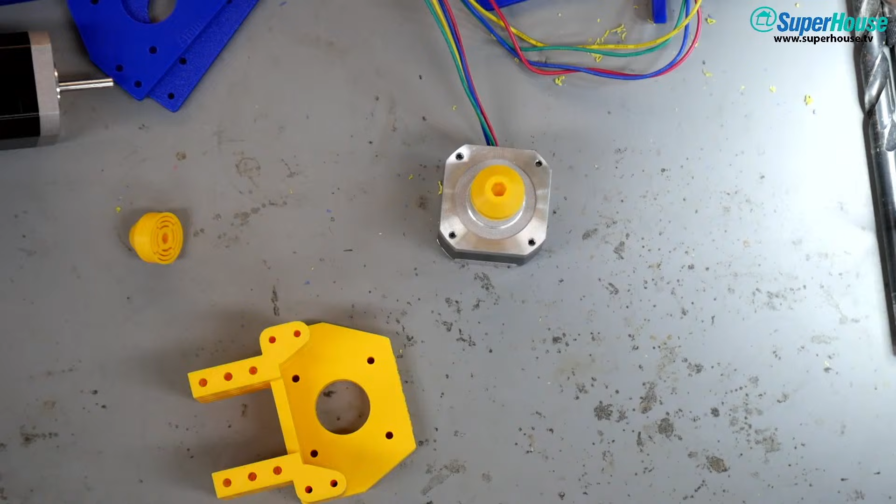Let's get some assembly happening. What am I doing? Okay.

Wagonload asks if there's a threaded hole in the end of the shaft. Interesting question. There is a hole, but I don't think it's threaded. I'm going to chuck it under the microscope to look down into it and see if there's a thread. There is not. It's just a little hole, and it only goes a few millimeters into the end of the shaft. So we can't clamp onto it that way.

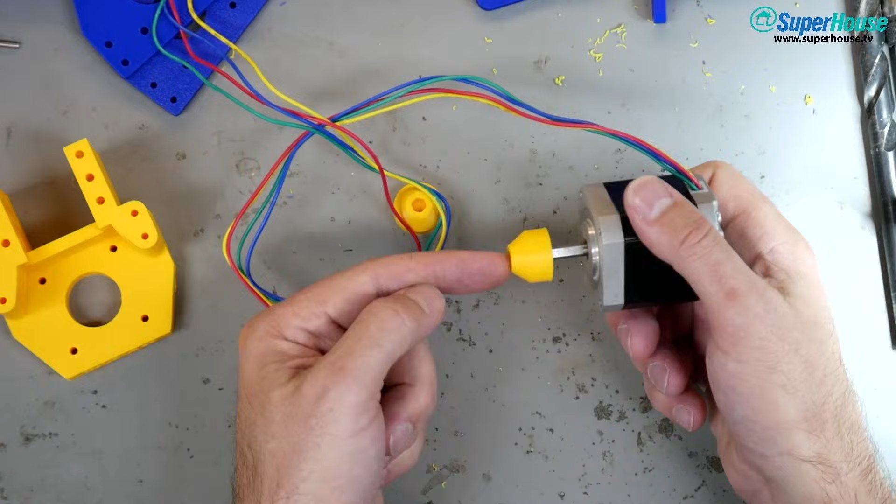Now this part, I'd be inclined to replace with some kind of coupling, like a tube with grub screws, a machined coupling. Grub screws to engage with the flat of the shaft on the stepper, and a connection for the M3 drive thing at the other side.

001 said, logical thinking from the guy whose username is the most abused item in any toolkit. Yeah, the most abused item in any toolkit.

Yeah, it actually feels firm now. Now that it's cooled down, it's not that bad. But still, okay, we're going to go with it for now.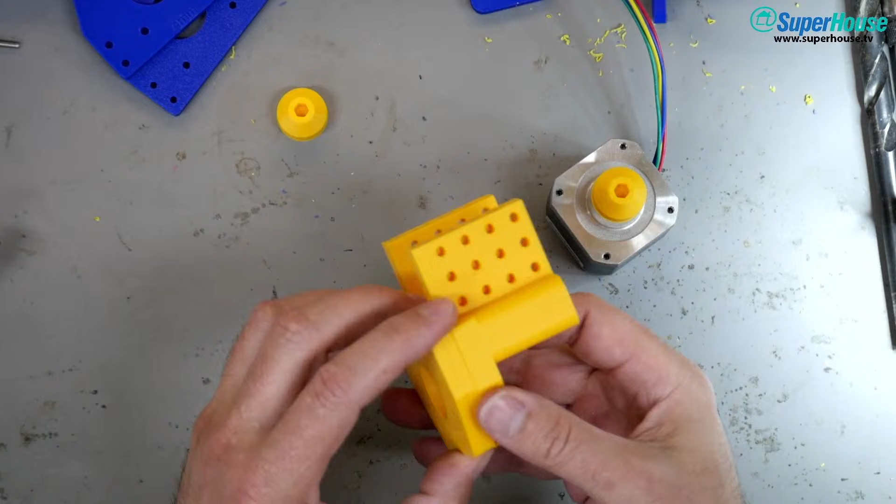So we have the captive nuts in there, and over here in the big kit parts, we have the spacer plates. We need 2 spacer plates. The order doesn't really matter, as far as I know it shouldn't matter. So I've got a 4mm and a 5mm spacer plate, giving us 9mm extra length to account for the fact that the shaft on this stepper is longer. So when this goes through, it puts that into the correct location.

But I do need to ream this edge out because the stepper has to recess into that way. Okay, back to instructions.

Oh, I've got stuff all over my bench now. I can barely even get to my computer. Just got stuff piled everywhere. Okay, so...

Rotate the coupling, ensure it's centered on the shaft. Yeah okay, done that. Put that through there.

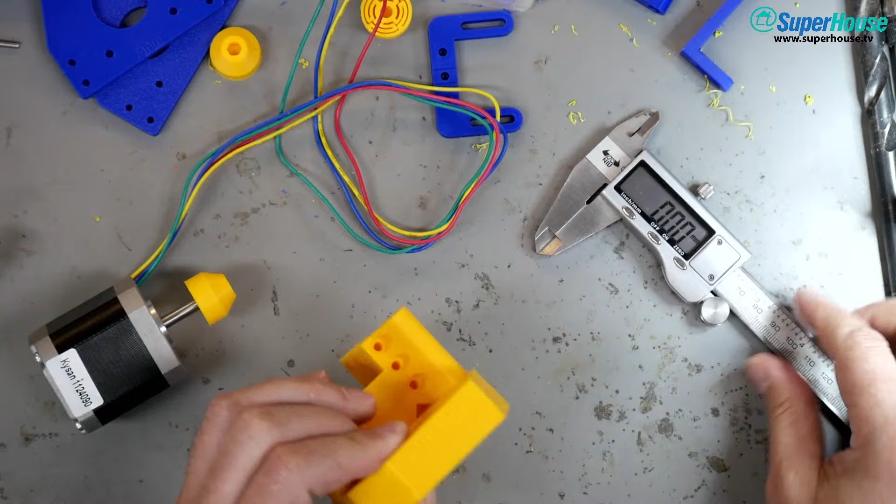Okay, so we need 4 M3 bolts inserted through. The length we need is based on the total thickness of that plus the depth needed to go into the motor. So that's 19mm, and then we want a few millimeters into the motor, so ideally something like 25mm, M3 25mm.

Let's see, do I have any? I do, I have a plentiful supply. And M3 washers, I also have a plentiful supply. So these are M3 by 25s, and I need some washers. I'll be selective, use nice looking washers, reject the dodgy looking ones, and keep them all consistent.

So M3 through there, and then we can bolt that through there with this. I think that's the right one. Yes it is. So what I can do is bolt through there, and then it goes through those two, and then into the motor from there.

So now, which way does the wire need to come out? According to the instructions, if this is sitting like that, the cable coming out of the motor comes out to the left, so it goes on like that.

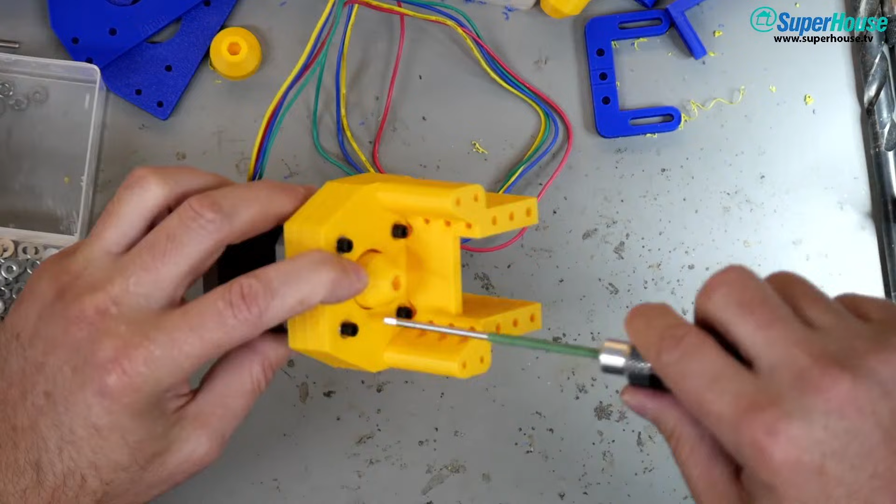How on earth did I think that, with all of my faffing around, I was going to get through assembling 3 of these axis drivers on a stream? No chance. I can make any 10-minute job take 10 hours.

Okay. Okay. And okay. All torqued to tolerance.

Very good. Okay, so now we've got the motor mounted, we've got the coupling in place, it rotates, and it looks like, I'm going to clamp it down there. It's reasonably centered as I rotate it, surprisingly more than I thought it was going to be. And it feels quite sturdy, so that's worked out better than I thought it would. The heating of the shaft turned out to be possibly a good idea in the end.

All right, now, what are we doing next? Okay.

Exact length of the thing will vary, blah blah blah. Rather than buying shorter screws, washers were added.

So from the nut bars and frame trio, remove supporting material. I've already cleaned up those holes. I didn't actually notice anything inside there. So this is like breakaway support material.

Well, it's not a different material, it's the same filament, but there's a little cylinder inside there to support the inside of that nut. I didn't actually see it in there. I don't know what happened with that, like why it didn't print.

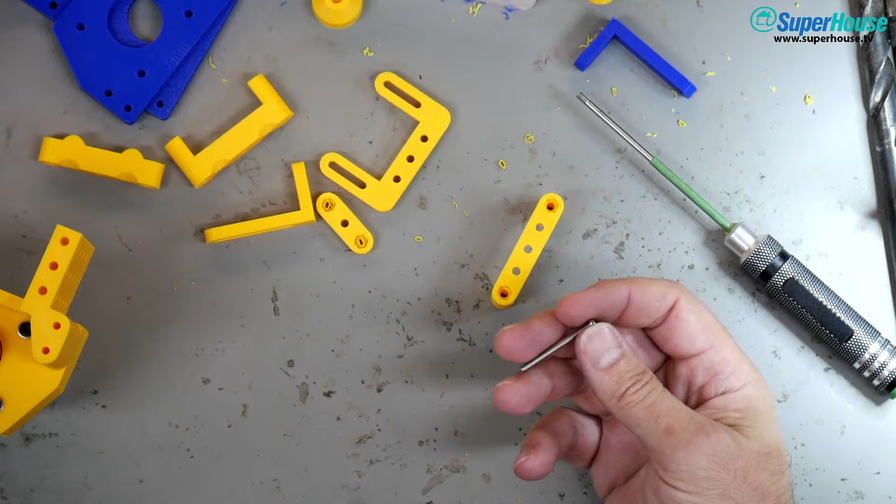Handy M3 bolts, need some nuts. Need one of those. And I'll grab out another one while I'm here. Oh, come on, I'm going for specific ones. I'm not just grabbing randomly, I'm going for ones that have got the smaller body size.

Okay, insert nut. And insert nut into the nut bar, baby.

Okay. Nuts are inserted in nut bar.

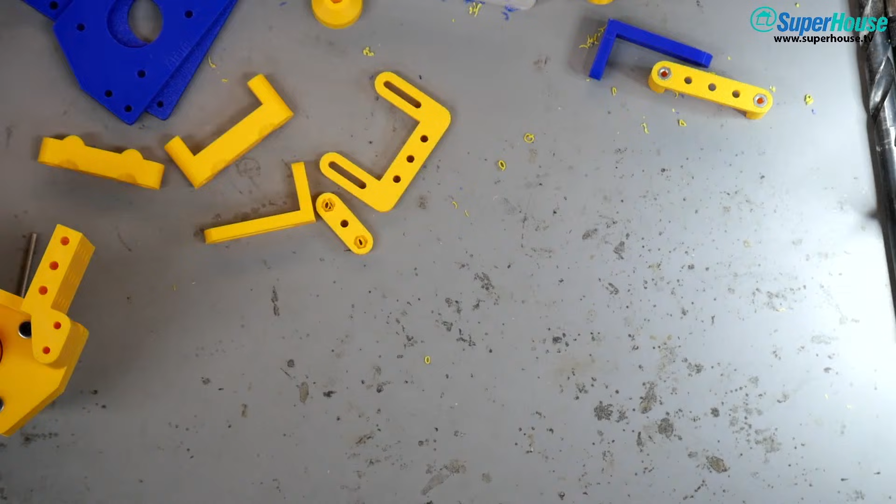Now we need nuts into, this bit is going to be slightly scary, into this. See, one there, and some under here. And I'm a little bit scared of this because I don't want to damage any of these flexures.

Okay, cleanup time. And do I put nuts in all of these or just the end 3? I need to refer back to those pictures again to figure out what's going on.

Yeah, so I'm going to tippy tap the nuts down into these holes, but I need to do it in a way that is not going to stress the mechanism.

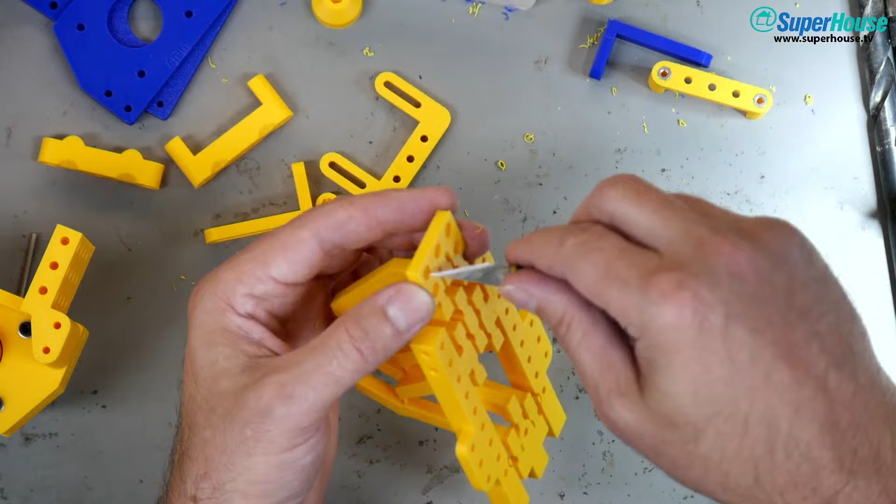And the instructions show you hanging the edge of this over the edge of a bench, and the camera might not be in quite the right place to catch it. We shall see.

No, it's off camera. Okay, I can do it with something else to try to get it on camera. What about with that? Yeah, that'd work.

All right, so what the instructions show is to have the edge of a bench, and then you sit this off the edge like that, so that you can then put the nuts in, and it's supported against a solid surface.

Does that translate to, I insult, therefore I am? Derido ergo sum. Yeah, not cogito ergo sum.

Okay, now back to here. And what's this thing? Okay, so, oh, we've got to put in all 5.

Yep, yeah, so this is the picture I was talking about. So it's showing hanging it off the edge of a bench and then putting those in. Press home, and then, yeah, so it says be careful to avoid stressing.

Ooh, that notification was the printer saying that it is finished.

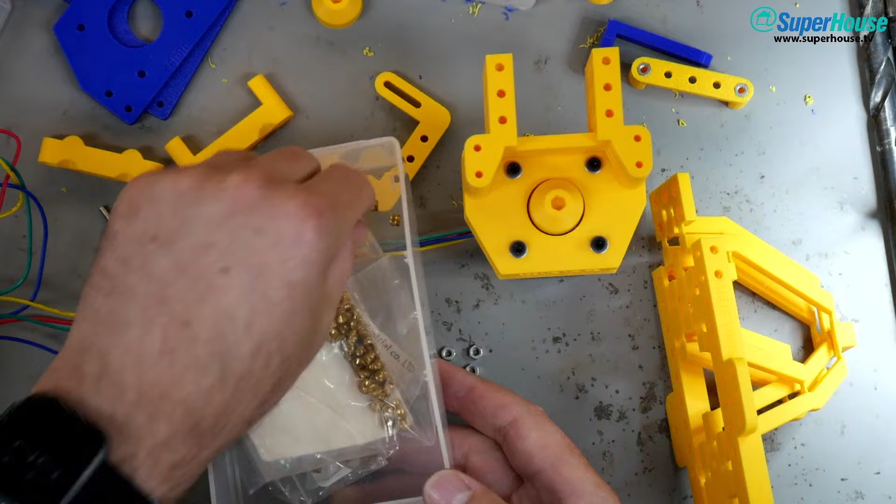I've got a few different styles of heat set nut, right here. These are M3 heat set nuts. They can be inserted with a soldering iron into plastic, and they've got little serrations around the edge so they grip. When the melted plastic recongeals, they end up held in place. I've got a few different styles and sizes of those.

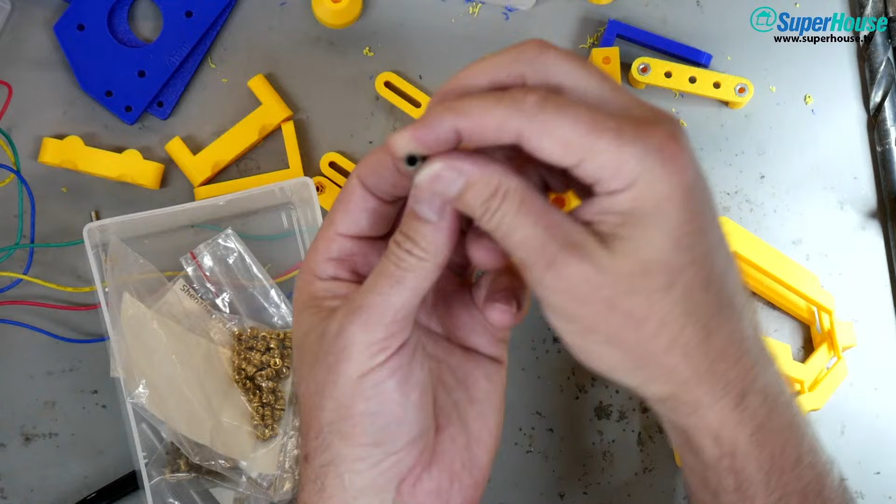This is the soldering iron tip I keep in this box because it specifically suits putting these in. So you can insert these heat set nuts using this soldering iron, and it works really nicely. I like heat set nuts, but getting them straight can be an issue sometimes.

Oh yeah, you were seeing that. I was just thinking that maybe you were not seeing the view.

Alright, I am going to very cautiously attempt to insert these nuts into this without breaking the mechanism. Ooh, tension. Actually, not tension, compression. Oh yeah, that was a very bad mechanics joke.

001 said heat set nuts are awesome, as long as you're not looking for precision. Yeah, if you just want something structural, that's fine. Getting them vertical can be hard. Or should I say, getting them so they're straight, that's not particularly straight. That's better. Yeah, getting the body of the nut to go in straight is quite tricky.

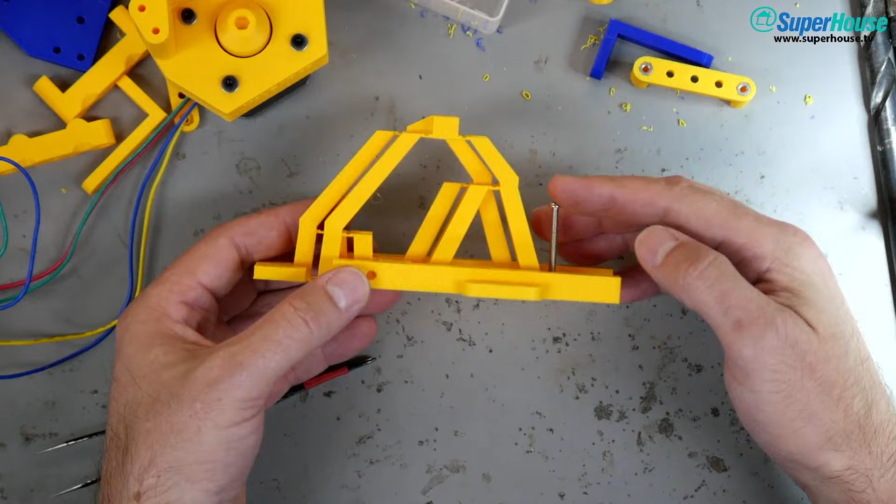Feels like it's fully bedded down, and just checking orientation - it seems straight in every axis. Hang on, I'm going to twist it slightly. There's a bit of play in the bolt, but it does seem to be straight in each axis. Okay, hopefully that nut is all right.

Then I have these, which go down into here. I guess they go pointy side down, so they'll end up with the two sides of the hexagon vertical. I can push it in with my fingers mostly, and then I'm going to push it down the last bit with the tool.

Oh, that one fell in. I don't know if that's bad or not. All right, I'm going to push this in. Yeah, that one is loose. I'll push that one down.

I'll grab a smaller hex driver to get into that little slot. Push down, push down. I guess the important thing is that they are aligned in the holes. Oh no, they need to go further in. You probably won't be able to see this, but if I look down the holes, I can see the nuts are not fully down into place.

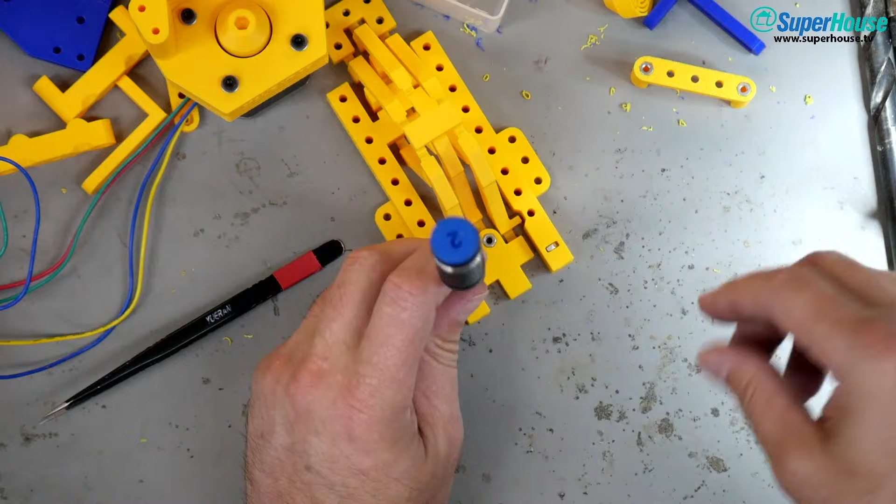So I'm going to tippy tap this until it beds down. And is it? Ooh, almost. It's very close to aligning with the shaft. Yeah, that looks pretty good.

Now this one. And is that aligning? Yeah, I think that's okay. I'm just going to give them a little bit more of a tippy tap to make sure they are fully bottomed out. And yeah, perfect - I can see the threads of the nuts directly in line with those holes now.

So I think that's good.

All right, now we're at a stage where I have not yet drilled out the bearing nuts to go in here. So these are M3 nuts that I need to chuck into a work vise and put in the drill press.

But I also just noticed time has got away from me. Okay, excuse me - fitting loom bands for anti-backlash.

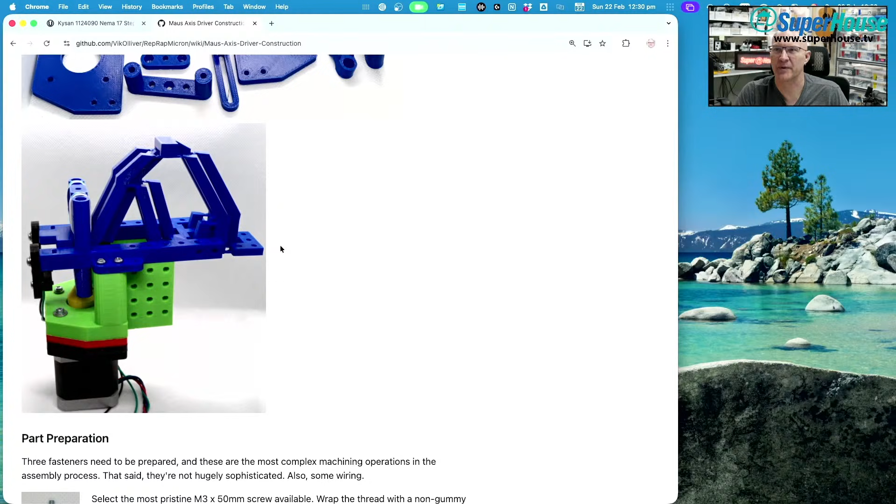Oh, the wire thingy? The wire thingy is a limit switch. So Wagon Loads asks, what does this gizmo do? There are several, yeah, we can answer that in the micro - this is a limit switch. In the slightly less micro, this whole structure - where is it? If I go right to the top it should show it - that is one of the axis drivers for the RepRapMicron. And zooming out even further, the RepRapMicron is a 3D printer for making micron scale stuff. So hopefully that answered the question.

Yeah, so I'm going to stop there because just cause. That's the only reason, no other reason than that, just cause. And because I said just cause, that is an obscure podcast reference for you. I bet people won't get that one. Although it is a very popular podcast, I just bet people won't get it. Okay.